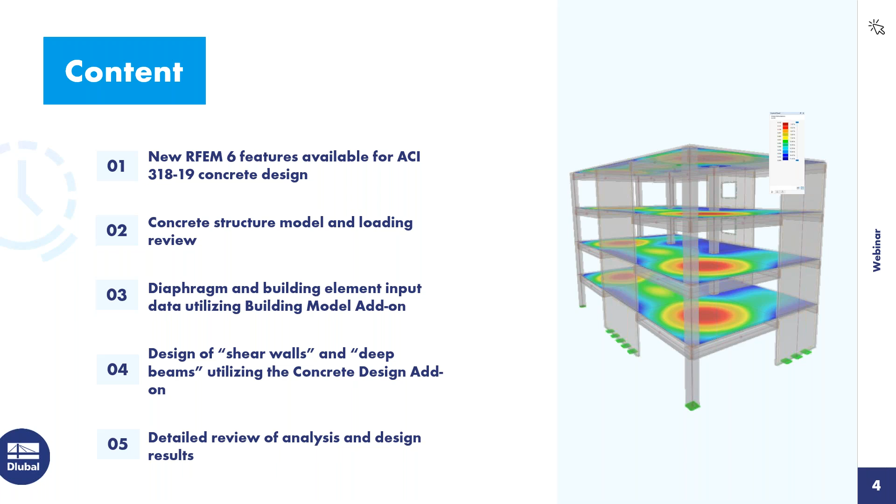For those not familiar with our program and the add-on concept, I want to quickly explain that for structure design related to concrete. RFEM 6 is the base program. This allows us to fully model the structure. We can integrate with BIM software. We have access to all the materials and cross sections in the library, and this is also valid for hybrid structures. We can load it and then get a full static analysis.

If we want to take this a step further to design the columns, beams, or surfaces, we need the concrete design add-on that will carry out the design according to the ACI, the CSA, or other international standards.

We then have the building model add-on. RFEM is a general FEA program, but this building model add-on releases building-specific features that give us the ability to define stories as well as shear walls and deep beams.

There are many other add-ons that will be relevant, but for today I want to mention a couple others used in our example for dynamic analysis. This includes the modal analysis add-on and the response spectrum analysis add-on to generate seismic forces. We won't go into detail on these add-ons today, but we have previous recorded webinars for both ASCE 7 and NBC that go further in depth on this topic.

Turning now to the new ACI 318 features implemented since our last webinar: we now have the ability to carry out the punching shear design check. This is for column-to-slab and wall-end-to-slab intersections. Currently, the design check will only flag the user if two-way shear reinforcement is required. There's currently no input option for that two-way shear reinforcement, but we plan to add that in the near future.

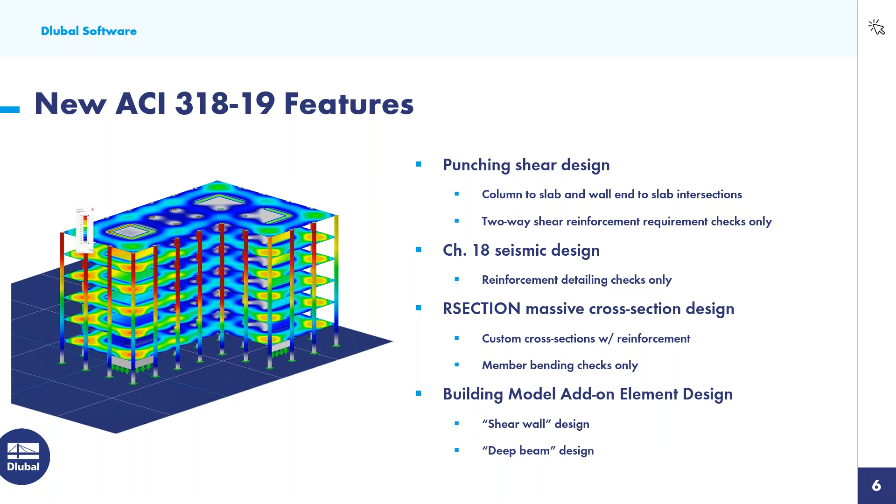Finally, we have the building model add-on that releases these building-specific features, and today we'll be focusing on shear wall design and deep beam design. In the next slide, let's talk a little more about the shear wall design we'll see in today's example.

This requires the building model add-on integration in addition to the concrete design add-on. Essentially, we draw these shear walls with 2D surfaces within RFEM. When we define it as a shear wall, what's happening underneath the hood is that a result beam is created, and a result beam simply sums up the internal forces across this 2D surface and presents it in a beam type manner.

We also can input the reinforcement under the shear wall dialog box. We have added this new cross ties input, and we'll see this in our example today.

As far as the design checks, we will refer to Chapter 11 for the in-plane design checks, as well as out-of-plane, in particular Section 11.5. We'll carry out additional Chapter 11 detailing requirements such as spacing and minimum reinforcement, and as mentioned, we also have Chapter 18 seismic detailing requirements where we'll check the spacing and minimum reinforcement requirements as well.

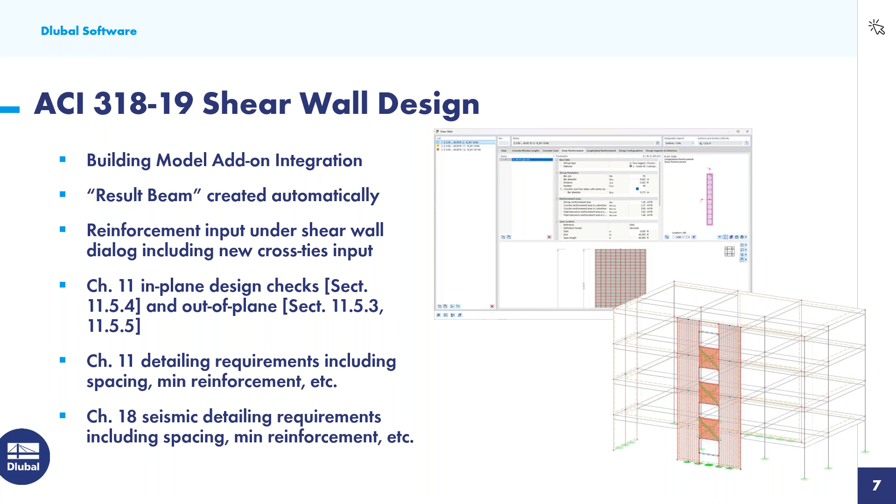Deep beam design follows a workflow very similar to the shear wall workflow in that we need the building model add-on integration. This is also defined as a 2D surface. We create a result beam underneath the hood, but instead of a vertical result beam for our shear wall, we have a horizontal result beam here to sum up all of the internal forces so that we can easily design this.

The reinforcement input options are also available under the deep beam dialog box, and we've added the new diagonal coupling reinforcement input. As far as the design checks, we will refer to Chapter 9 for deep beam shear strength and detailing design checks, and we can also consider Chapter 18 seismic shear strength and detailing requirements for coupling beams.

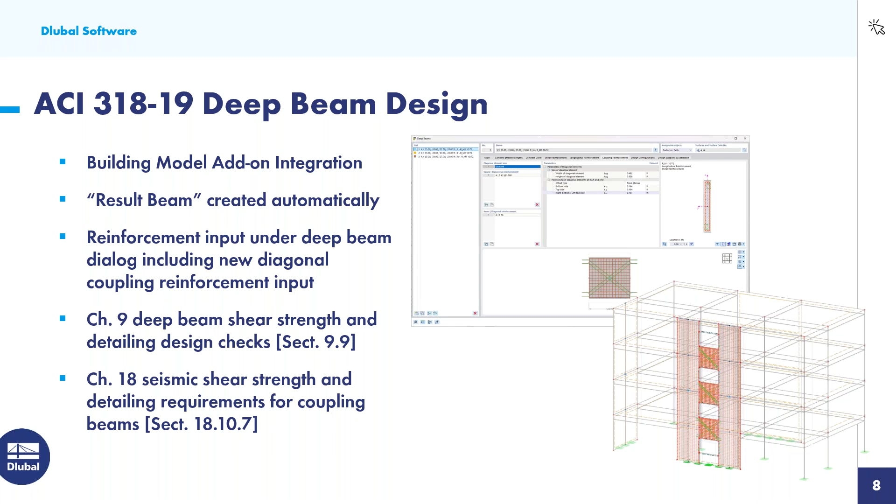With that said, we will now turn to our example within RFEM. When we begin a new model, we are presented here with the base data dialog box.

Under the second tab are all of the various add-ons that we have available, so essentially you're creating a custom software package specific for your design needs. For today's example, I want to begin by enabling the concrete design add-on, and we also talked a little bit about the dynamic analysis add-ons that we'll utilize in our example here.

Under the third tab for standards, we can generate the load combinations automatically according to ASCE 7. You'll notice here the latest 2022 standard is implemented. We'll also take advantage of our automatic wind load generators as well as snow load generators.

We can set the standard here under the second option also to ASCE 7. The concrete design is set to ACI 318, the 2019 standard, but you can see here the alternative standards we offer, including the CSA. Finally, dynamic analysis for the response spectrum analysis will be carried out according to ASCE 7.

Now that we have this information set, you'll notice I've gone ahead and modeled our concrete structure for today. So let's do a quick overview, beginning with the materials. Everything is defined here with 5,000 PSI concrete that was pulled in from our material library.

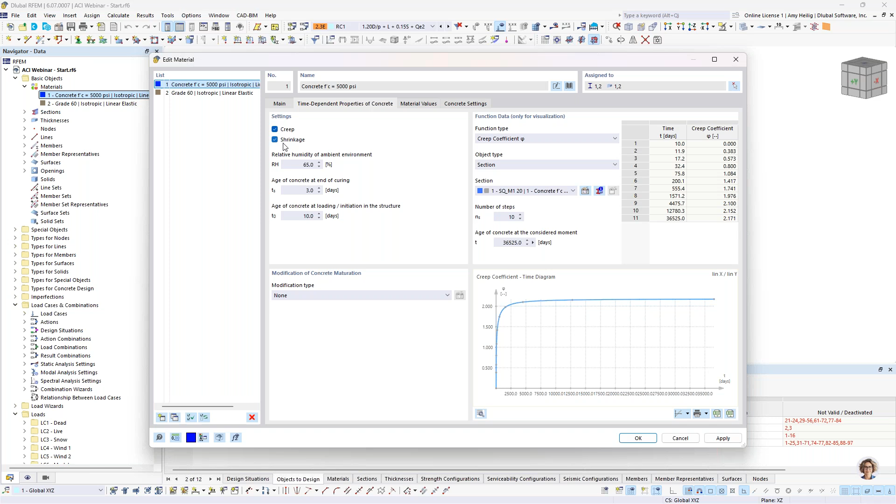Specific to concrete, we have this second tab available under time-dependent properties of concrete, where we can further specify the creep and shrinkage behavior of this material. This will come into play a little later on for those time-dependent deflections. If we do specify creep and shrinkage, we refer to ACI 209 for that consideration. For today, I'm not going to take advantage of the creep or shrinkage input.

So we will now move on to the cross sections. You'll notice the columns are defined as 20-inch by 20-inch square sections, and then we have various beams here that are supporting the slabs and spanning in between the columns.

If I zoom in here and double click on one of these members, I want to point out that the member type is not set to beam. A beam is any standard column or beam element, but rather this is set to a rib. When we specify this under the second tab, rib, we can actually define the effective width on the left and right hand side of this beam element.

We further have the ability to integrate the internal forces and loads from the slab element itself from the static analysis, and then we can design it as a T-beam within the concrete design add-on.

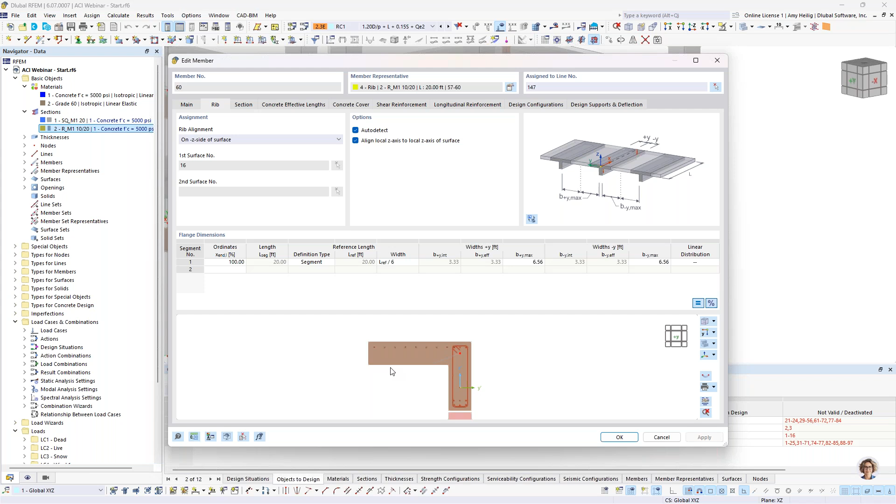For this rib element, we're at the edge of a slab, so we only have effective width defined on the left-hand side. This is unique to rib elements rather than a standard beam element. We also have the thicknesses defined here, assigned to the surfaces.

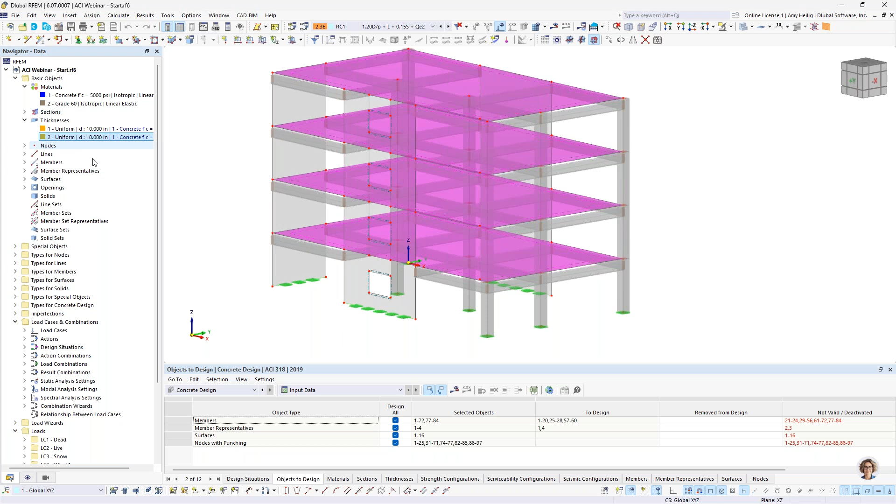For our shear walls, we have 10-inch thick concrete defined, and for our slab elements, these are also 10-inch, 5,000 PSI concrete. At the base of the structure, we have nodal supports at the columns that are rigid, and we also have a fully rigid support at the base of our surfaces defined as a line support.

So we'll now move on to a loading overview. Going into the load cases and combinations dialog box, you'll notice under the load cases that I have defined dead, live, snow, and wind. These are our static load cases.

Once we have these defined within this dialog box, we would actually need to apply the loads graphically to the structure. So we'll back out here and take a look within our drop-down at the dead load case. Self-weight is automatically considered internally for all of the elements, but I have added an additional surface load here of 50 pounds per square foot.

We are not confined to applying a surface load to the entire surface itself, as you can see with this option in our toolbar. Rather, we also have these options next to it called free loads. For example, a new free rectangular load could be applied to just a certain portion of the surface rather than the entire surface as a whole.

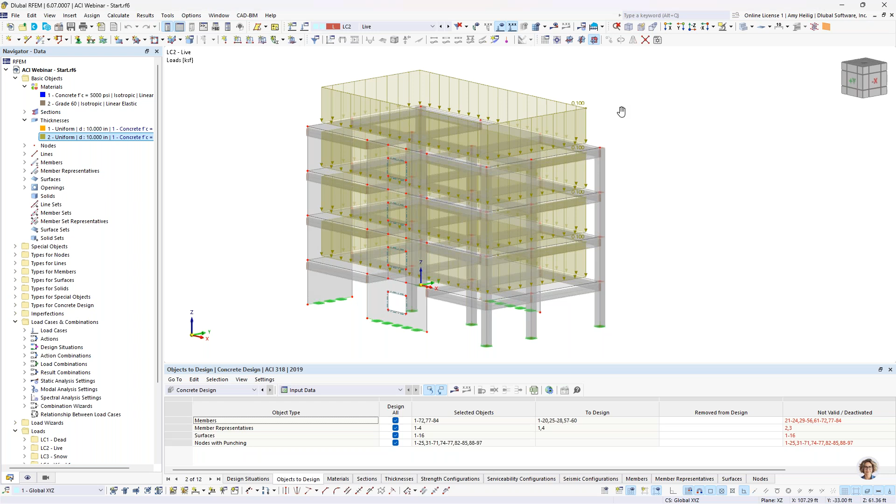We also have the live load case here, same concept. The magnitude for the surface load was increased to 100 pounds per square foot.

Then we have our snow load here at our roof level, and for this I took advantage of the load wizards found in our dialog box. Under the load wizards, we set this to ASCE 7 so that we can automatically generate the snow and wind loads. If I go into this dialog box, you'll notice we just specified the geometry and input the parameters specific to ASCE 7, and the program calculates these snow loads for us.

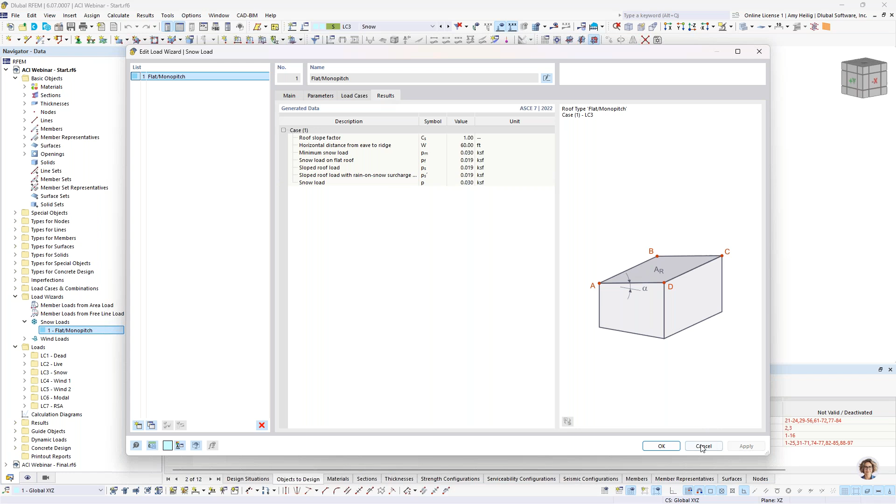Very similar, we have our wind load generator. If I toggle to my wind load case, we see this applied lateral load. I'll go into the wind load dialog box here. Again, we input the geometry points, the type of roof, and the parameters specific to ASCE 7, and the program can generate all of the wind load cases from case 1 and case 3 of ASCE 7.

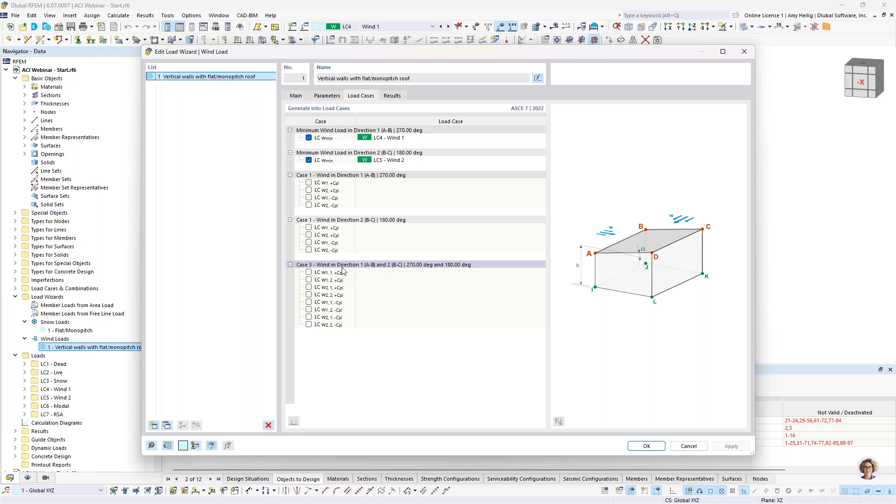For this simple example, I am just generating the minimum wind loads in both directions, so everything else is unchecked here. For our first minimum wind load, we can see this applied area load laterally in the global Y direction. If I'm interested, I can always right-click to display separately, which shows the loads applied to the structure based on the tributary areas.

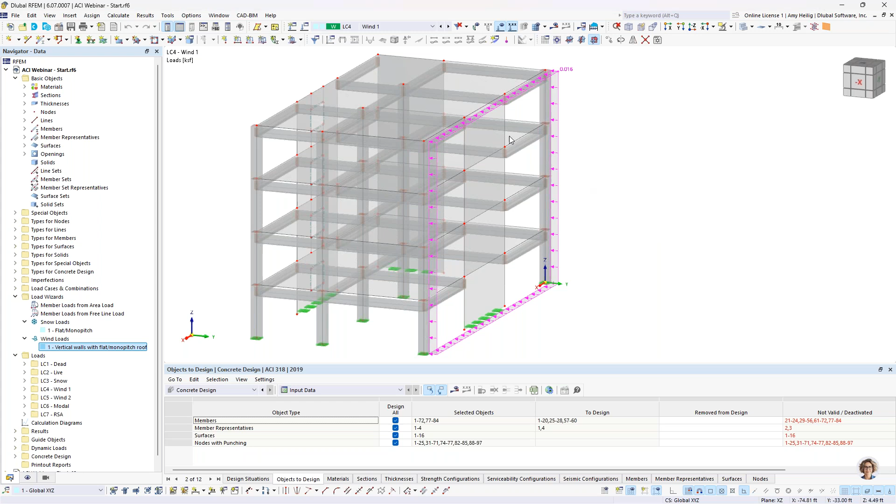If I'd prefer, I can turn this back off for a cleaner area load display instead. Similarly, we have wind load in the other direction with that applied area load.

Going back to our load cases and combinations, I also have a couple of dynamic load cases here as well. I'm not going into detail with this—it's covered in previous webinars on our website and YouTube channel—but we have a modal analysis load case where we carry out the eigenvalue analysis to determine the natural frequencies, vibrations, and mode shapes of the structure.

We can import a mass combination for this calculation, and we also have our response spectrum analysis load case, referring to ASCE 7 to generate these seismic loads in the orthogonal X and Y directions. Ultimately, once we have all of these load cases set, we need to combine them into the load combinations.

Under the design situations here, you can see that the program is automatically going to group together these load combinations in what we call a design situation. So we have our first two design situations here in orange that are going to include our factored load combinations from the ASCE 7s, 1 through 5.

And then this second factored design situation is going to include all of our seismic loads, 6 and 7, again directly from the ASCE 7. We can click on this little info button here to see that information pulled directly from the standard.

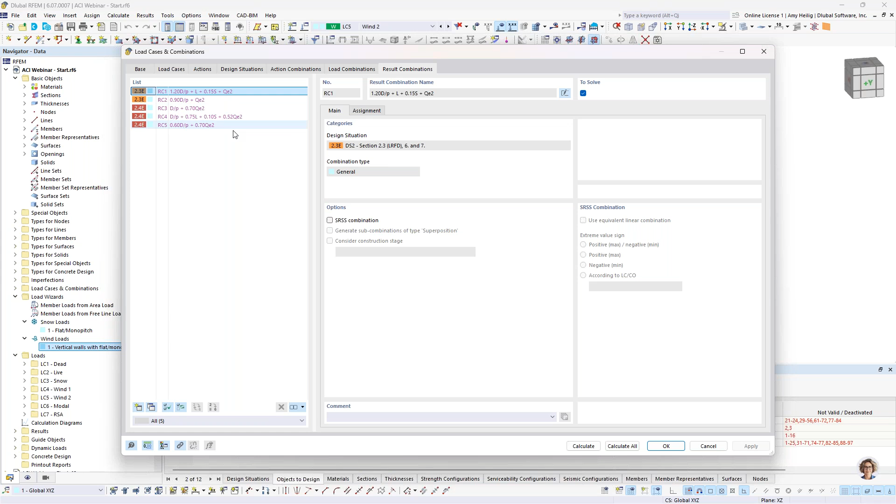One more thing I want to touch on is that you'll notice that for the load cases, I have a structure modification set here, and this is really important for concrete design. If we go in and take a look at this definition, I have enabled both members and surfaces because these are the two elements that we have in our model today. And then I get two additional tabs up here at the top.

Within my first definition type here for members, what we have the ability to do is to directly select the ACI 318. And this is going to refer to table 6.6.3.1.1a to apply those I-crack factors to our member elements within the model. We would want to select whether this is a column or a beam, and we can see the relevant stiffness modification factors given here.

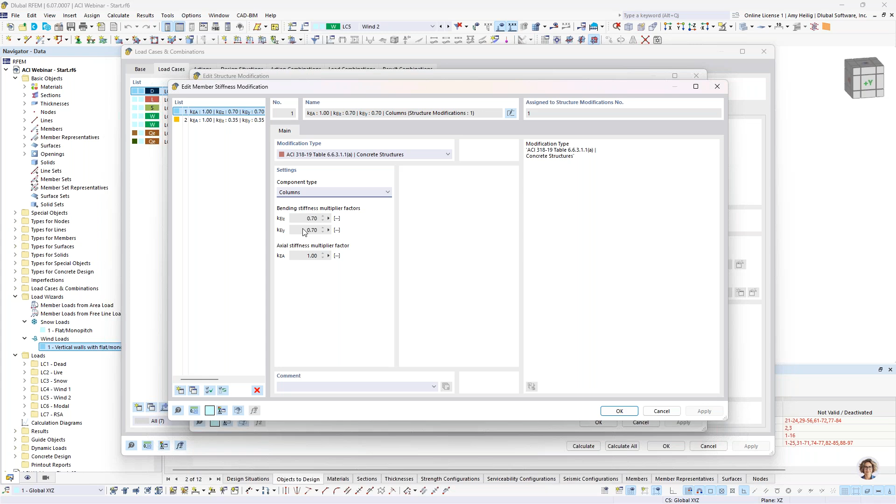So once we have this definition, then we can graphically select all of the column elements within the model that this stiffness reduction should be applied to. Same exact concept here for our beam elements.

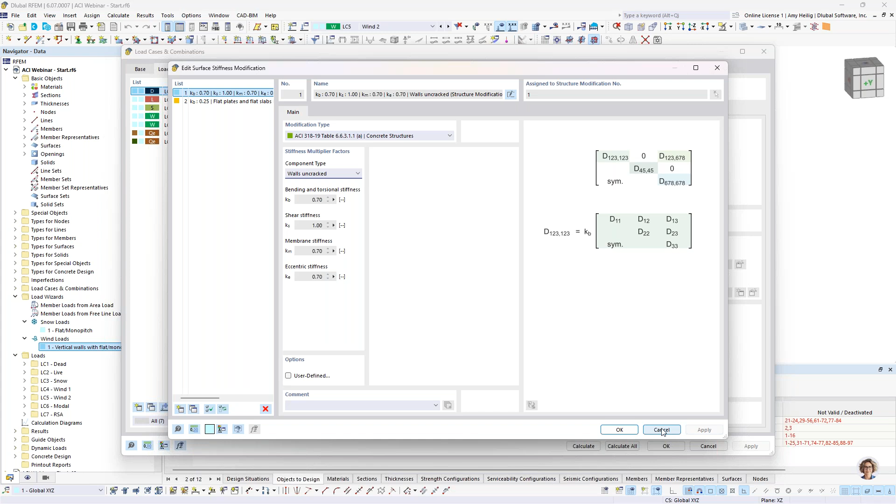And in a very similar manner, we also have the surfaces tab here that I created my first definition by simply selecting the ACI from this dropdown, and then I would choose whether it's walls uncracked, walls cracked, flat plates, or flat slabs. This refers directly to the ACI for those I-crack factors, and then we can graphically select the surfaces that this stiffness reduction should apply to.

So we could go ahead and apply this to all of our load cases. It's also possible here under our design situations, especially these factored design situations, that we go in here to the combination wizard options and we activate this structure modification here as well. So by doing it within the design situation, you'll see here that the load combinations automatically include those I-crack factor stiffness reductions as well.

So now that we have covered the loading and the structure, it's now time to input the reinforcement that's specific to the concrete design add-on that we have already enabled within the base data dialog box. So before we begin, what you'll notice here is that we do have the concrete design option available within our dropdown of our table. So when we select this, there is this option here called global settings.

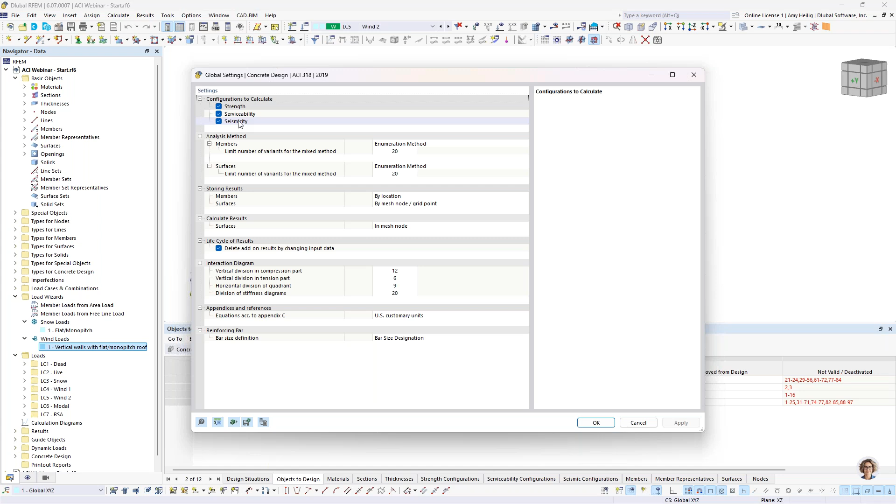Now, by default, the strength and serviceability design checks will always be carried out. But if we are wanting to further carry out those seismic detailing checks, we would want to go in here and turn this on, because by default this is typically not enabled. So we'll go ahead and do that for today.

Okay, so we want to talk about the reinforcement input for a column. If I double click on this column here, you'll notice the design properties checkbox is turned on. This tells the program that not only are we interested in carrying out the static analysis within the base program, but I also want to utilize that concrete design add-on to input the reinforcement.

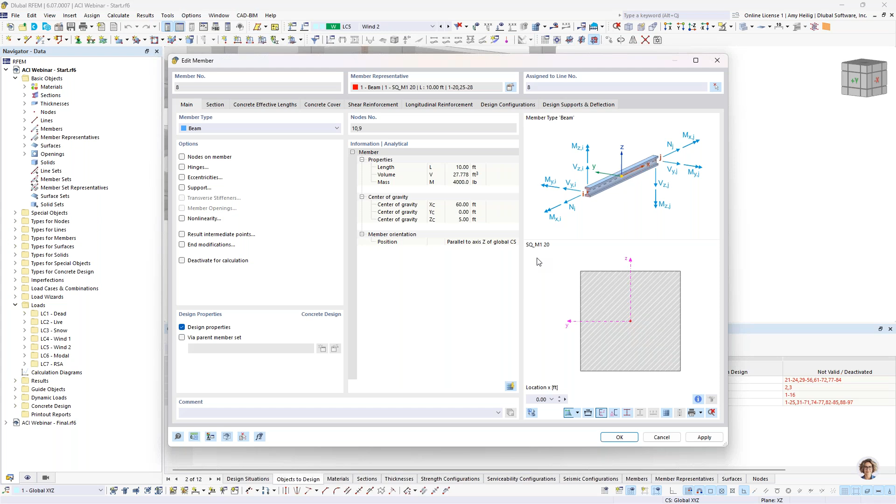Now, when I turn this off, you'll notice all of these tabs disappear. This simply tells the program that we're only interested in the analysis. So we certainly could carry out the reinforcement input here within this single column, but I do want to talk about the benefit of what we call member representatives.

Currently I have this turned off graphically within the model, so I'll go ahead and turn that on. You'll notice we have a lot of color-coded dots here for each of these members. This is because the program has grouped together identical members in what we call member representatives. Members that have identical cross sections, materials, lengths, and possibly even for concrete, the same reinforcement input, will all be grouped together.

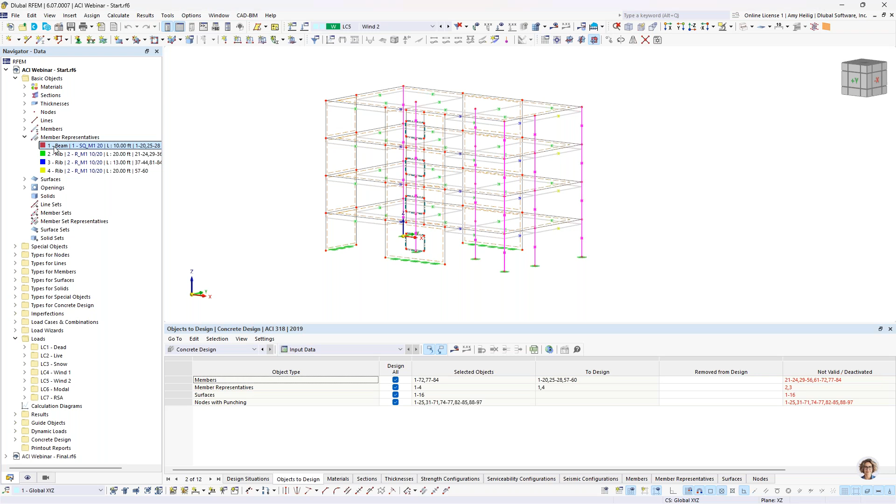Now, the benefit is that if I take a look at member representative number 1 here, you'll notice this has grouped together all of my columns, highlighted in the background. I have these exact same tabs here to input the reinforcement as I do for the individual columns.

The benefit is that if I define the reinforcement here within the member representative, it's applied to all columns at once. If I need to go in and make a change, I do it within the member representative, and again, it's going to affect all the columns defined here. So we will go ahead and input these various tabs, and I'll go through these in detail.

The concrete effective length: if we are carrying out a first order analysis and utilizing the moment magnification method, we would want to go ahead and input an effective length. However, if we are designing to second order analysis and considering P-delta effects, which we are within our load combinations today, we don't really need to do anything within this particular tab. So we'll go ahead and design according to second order analysis.

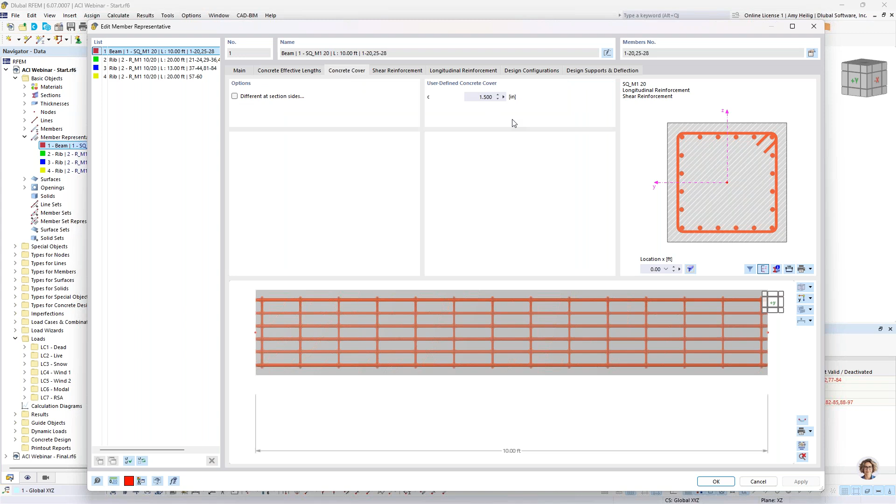Now the concrete cover should be input. This is left here at 1.5 inches, which is the default.

Now I went ahead and input the shear and longitudinal reinforcement for these members, so we'll just go ahead and give a quick overview. The shear reinforcement is set at number 4s at 9-inch spacing on center, so we can see that spaced out evenly along the member here.

Now it's entirely possible to create different zones for both our shear and our longitudinal reinforcement with this option in the lower left-hand corner, and then we can modify the span location. So for example, if we wanted closer spaced shear ties at the ends of the member versus the center, we could create a couple of different zones here.

The longitudinal reinforcement, you'll notice I have selected the option from our dropdown here as uniformly surrounding for the longitudinal bars. I have defined 20 number 6 bars, so the program will go ahead and place these around the cross section as shown.

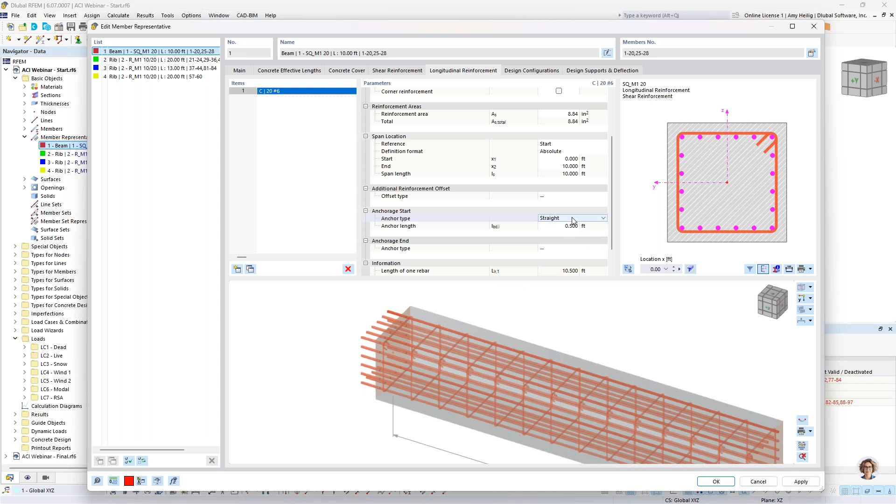Now we do have additional options here to define a development length if we would like. You can see that within the dropdown box here where the development length is shown graphically, and we can modify that development length itself in terms of feet. For today's example, I'll go ahead and leave all of the development lengths off, but that is where you would want to input that information.

Now, the design configurations - I'm only going to go through this tab once because it's the exact same application for all elements we are designing. We have here these strength configurations to begin. If I go into the default setting here, you'll notice we have 4 different tabs depending on which element we're designing, whether it's a member or surface or even punching shear. These are all of the various options specific to the strength design checks according to ACI.

So whether we're turning options on or off or modifying them, this is all specific to the strength design. We did put in the code references, trying to clarify exactly which settings you are modifying, so you can refer directly to the ACI standard. Now, it is also possible to create different configuration settings for different elements. Currently this is assigned to all of our surfaces or members or punching shear, but you can create multiple definitions in the lower left-hand corner and assign them to different elements.

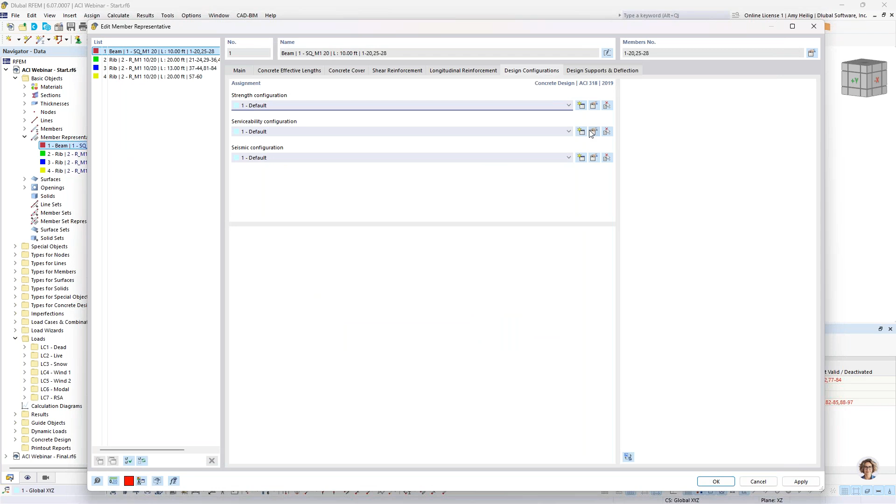We also have the serviceability configurations here, which are specific to the serviceability design check. For example, we can calculate the crack width. For surfaces, we have minimum reinforcement due to shrinkage and temperature. We also can check deflections, whether that is simply supported or cantilever beams or columns, and this also can be carried out for surfaces.

If you remember, we talked a bit about time-dependent deflection. I mentioned that under the material properties, when we input creep and shrinkage for that material in more detail, we probably want to toggle this to refer to ACI 435, which is a far more complex approach within the serviceability design checks for long-term deflection. Alternatively, when we leave this as default with the factor according to ACI table 24.2.4.1.3, we're simply going to apply a factor to the immediate deflection based on the duration of the load - a much more simplified approach.

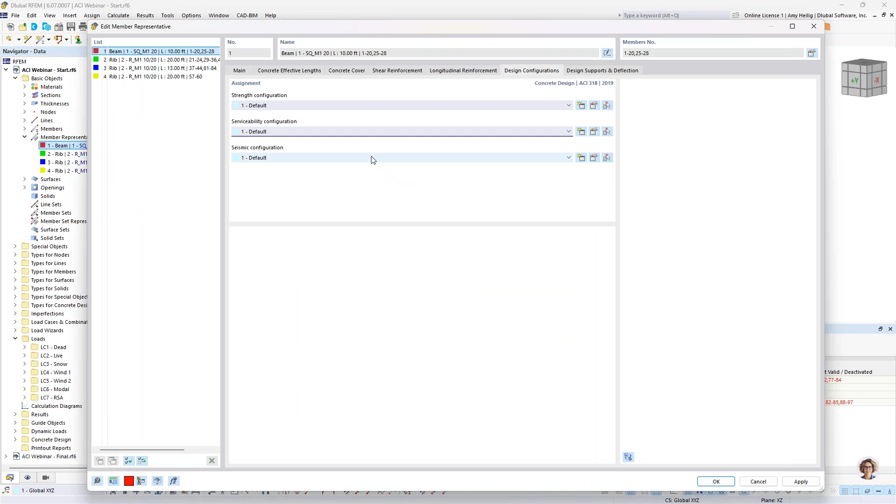Finally, we have the seismic configuration. For the seismic detailing checks, we can select for our members whether the seismic design category is one of the options from this dropdown. We also have the frame type here, set to ordinary, intermediate, or special moment frame. Again, this is applicable to members and to surfaces for those additional detailing design checks.

Finally, we have the design supports and deflection. If I input nothing within this tab, the program will simply assume that this member is supported at both ends, and it will refer to the limiting deflection ratio for simply supported members. In contrast, if we have a cantilever, we probably want to assign a design support at the left or right end so that the relevant deflection limit is referred to. I am just going to leave this as simply supported for our column elements, but we'll see in a minute how we can set this differently for our rib members.

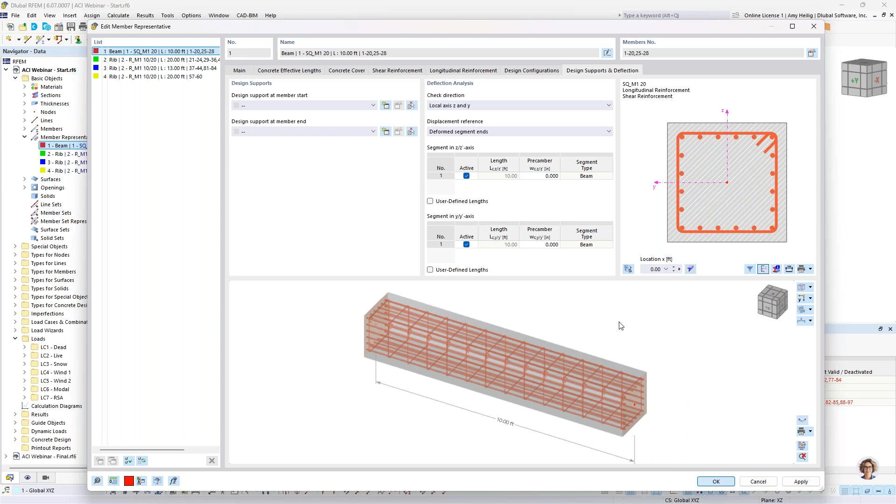Once this information is done, we want to move on to the reinforcement input for our four rib members over here on the right-hand side. Very similar to the columns, these are all grouped together in a member representative as well. Taking a quick look to review, because it's a rib member, we are going to include the effective width of the slab for the member design. And we run through these various tabs.

Concrete cover is set to 1.5. The shear reinforcement is number 4, set at 6 inches - again, we could set different zones if we'd like. The longitudinal reinforcement is going to be a little more detailed than what we saw with the columns. You'll notice I have 3 number 6s set to symmetrical, so this places 3 number 6s up at the top and at the bottom, currently highlighted. We also have an additional 3 number 6 bars defined at the bottom with what we call the rebar type line.

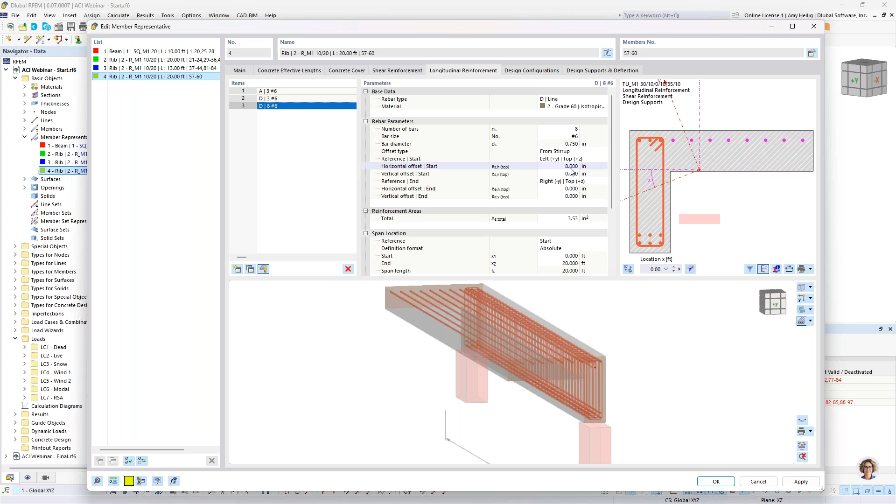This line option allows me to place a line of reinforcement, and I can specify the different offset either left or right or top or bottom with this input option. Finally, we have 8 number 6s that are defined in that surface effective width itself, also defined with the line option. I modified the offset here, such as 8 inches, so that we can input this longitudinal reinforcement within the slab element. It's pretty simplified for today because we'd probably want to create different zones with different longitudinal reinforcement, but this is just a little overview for this simple example.

And finally, the design supports. What I would like to do with the beam element is maybe reduce the shear force for our design check a distance of D away from the support face. The only way to do this is to input a design support. You'll notice I created a definition type here for a new support type, and the type must be set to concrete. We would set the support width, which I've set to 20 inches to reflect the column it's connected to. We would define whether it's an inner support or not - in this condition, it's not an inner support. We also can define if the support should be active for deflection design in the strong and weak axis. For clarification, I just went ahead and activated this in the strong axis direction.

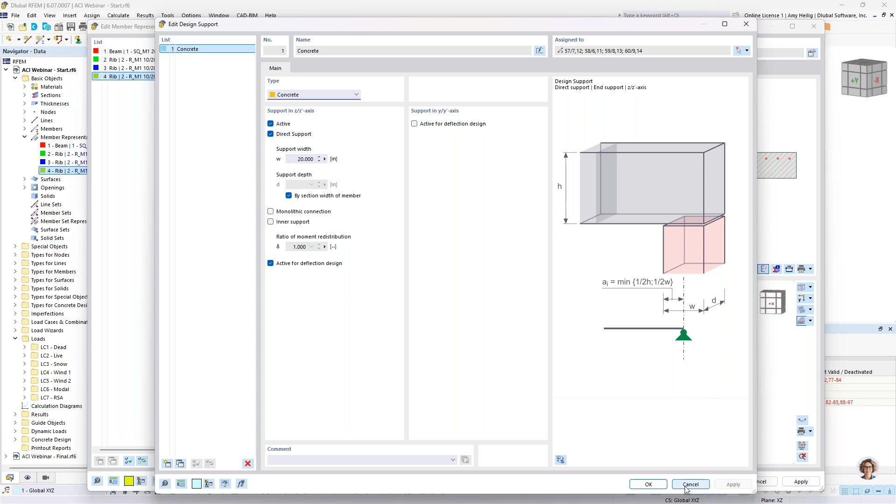Once we create that support, we can select that same definition type here at the member end, and we actually see the support shown graphically in this dialog box. This is how we can consider that reduction of the shear force.

Now that this information is input for our beams and columns, if I go to the second tab under the navigator and turn this into wireframe view, we can actually view the reinforcement that we have input graphically in the global 3D model. This is only specific to the elements I have defined so far. If it feels a little overwhelming, you can always turn that off.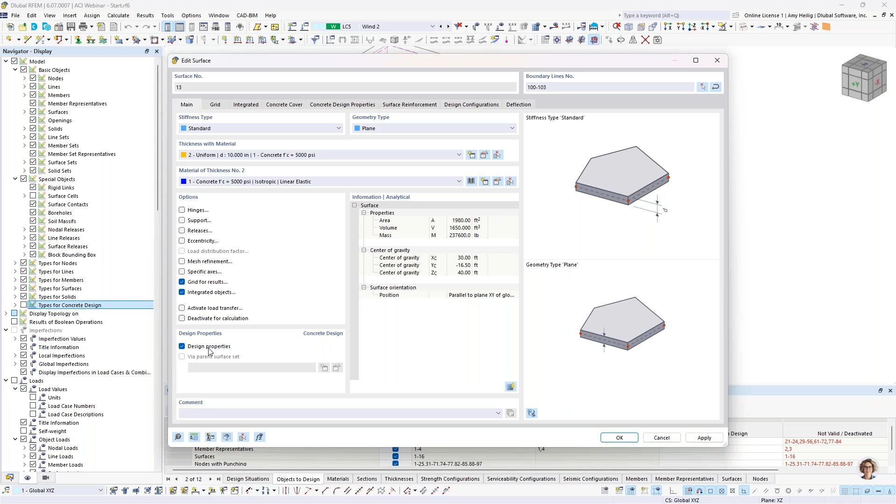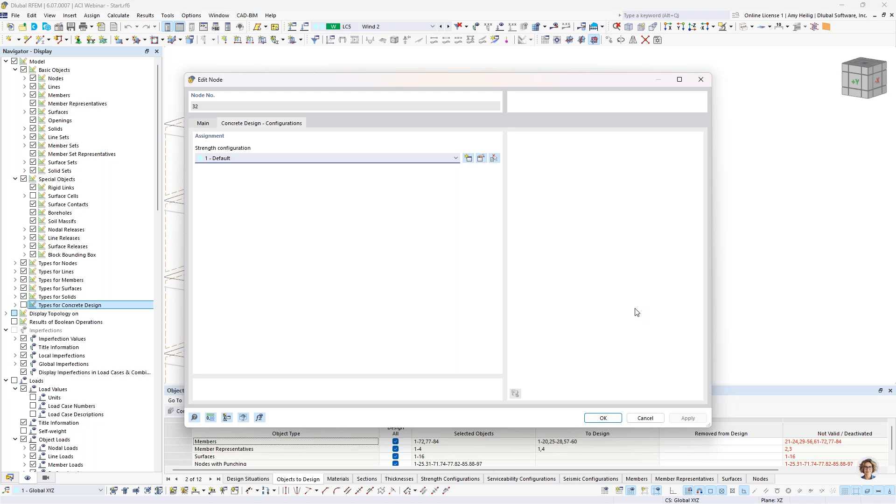Now, to talk about the surface reinforcement, I'm not going to go through this—it was covered in a previous webinar, but it's the exact same concept where we can activate the design properties and input the surface reinforcement. Similarly, for punching shear checks, we would choose one of the nodes where it's framing into that reinforced slab, double click on it, and again we have a checkbox for punching design and an additional tab for the strength configurations for those punching design checks. We won't be doing either one for today's example, but I wanted to mention it.

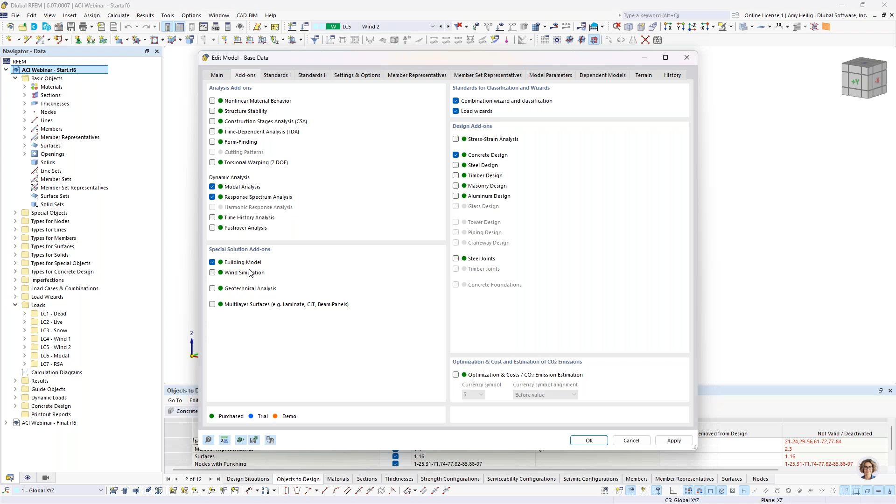So now it is time to move on to the building model add-on. I want to right-click to activate the base data dialog box, and under the add-ons we will turn on the building model add-on, then click OK. At first glance, nothing changes graphically. The only thing we now have access to in the navigator is a new folder called the building model, so we can now define our building stories in this general FEA program. I'll go ahead and double click on this dialog box.

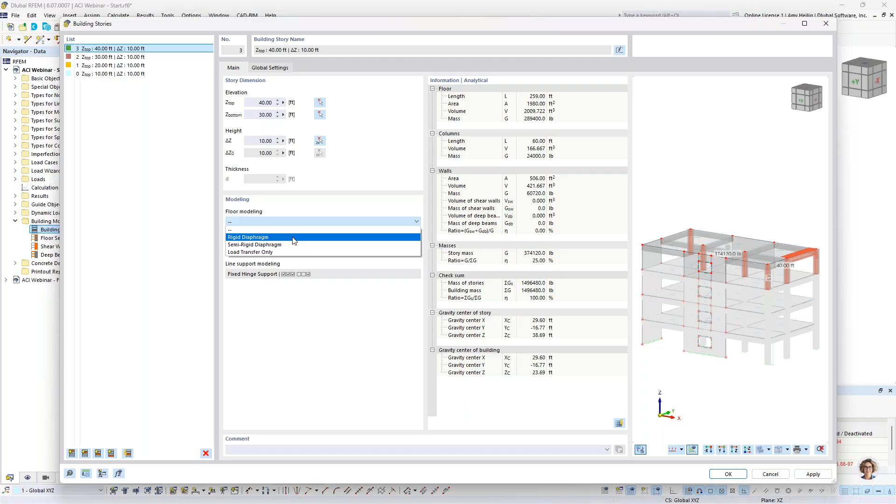The program automatically assumes we want to create our first story and detects the height of that first level. We'll continue to create additional stories above it using the option in the lower left-hand corner, for a total of 4 floors. Once we've created the different stories, for each floor we now have the ability to assign a diaphragm—either to that particular floor or to all floors—including rigid, semi-rigid, and load transfer only. Let's go back to the PowerPoint because I want to discuss the building model add-on concept in more detail, as well as these diaphragm options.

As mentioned, RFEM 6 is a general FEA program. We are not restricted to only building analysis and design; rather, we can model tanks, silos, fabric tensile structures, or maybe an FEA of a steel connection—really anything is possible. But this building model add-on is releasing building-specific features in this general FEA program, such as the ability to define stories. We also have the option, which we'll see in a minute, to define shear walls and deep beams.

The added benefit of the building model add-on is that once we run the static analysis and even the dynamic analysis, we get additional results available in table format by stories. For example, in a response spectrum analysis, we can view the story shear or base shear in table format. For static or dynamic analysis, we can also view the shear wall forces in table format and export that to Microsoft Excel quickly. If we have a rigid diaphragm, we can view in the table the center of rigidity, as well as graphically where that center of rigidity occurs. So many more options specific to buildings will be released.

Now, as mentioned, we have various diaphragm types available. We recently released semi-rigid diaphragms, so now we have all 3 options available to you: rigid, semi-rigid, and what we call load transfer only, otherwise known as a flexible diaphragm.

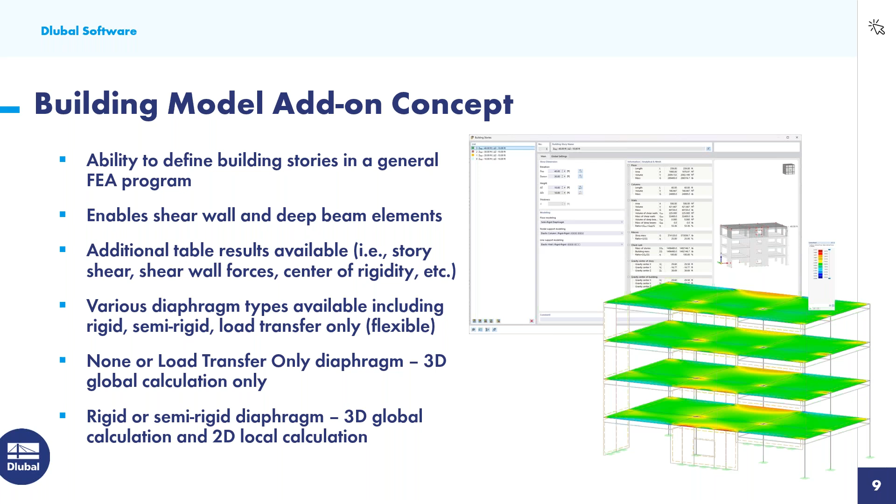However, when we choose a rigid or a semi-rigid diaphragm, not only are we going to carry out this 3D global calculation, but we're also going to extract each individual floor to run a separate 2D local calculation. So let us go to this next slide to explain this in a little bit more detail.

Again, this is specific to rigid and semi-rigid diaphragm options only, where we are going to run these two separate calculations. As I go through this, keep in mind that we will see this in the results in our example today, so hopefully that will make more sense once we can see it applied.

The first 3D calculation, what we call the walls global 3D calculation, we are going to run through all load combinations. This includes both gravity and lateral loads. The difference here is that the floor in-plane stiffness is going to depend on the diaphragm type, and I'm going to talk about the stiffnesses on the next slide for all the different options. But for the floor out-of-plane stiffness, this is going to be set to 0. So this is what you can expect with this 3D calculation.

Then we're going to run an additional local 2D calculation. What we do here is we extract each individual floor or diaphragm and all the surfaces included in the horizontal direction, as well as those rib elements, and we run a separate submodel calculation underneath the hood. Instead of the columns and walls framing up underneath this floor, we replace those with nodal and line supports.

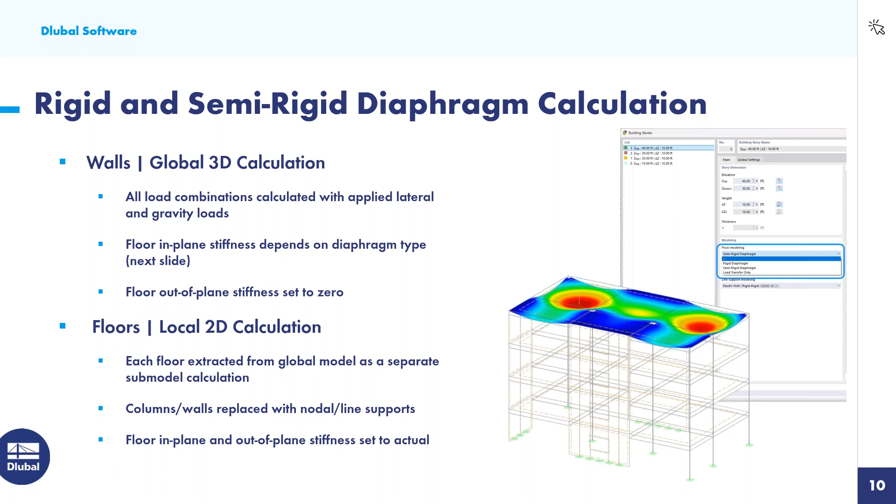So on the next slide, I thought it would be worthwhile to create this table to summarize the different diaphragm stiffnesses depending on the type that you have set for both the 3D and the 2D calculation. You can certainly refer back to this table if you're integrating these diaphragm options, if you're wanting to know what type of stiffness is used where.

Over on the left, we have the different diaphragm types, including rigid, semi-rigid, the load transfer only, otherwise known as flexible, or if you have no diaphragm set. Now, the first couple columns here is going to be related to that global 3D calculation. The rigid diaphragm is going to use no stiffness in the out-of-plane direction, but in the in-plane direction, we set this to something infinitely high, a very, very high stiffness.

In turn, for this semi-rigid diaphragm, again, out-of-plane stiffness is set to 0, but the in-plane stiffness is going to be the actual stiffness. So we're going to look at the materials, the thicknesses, and use the true stiffness properties in the in-plane direction for that 3D calculation.

Then we also have the load transfer only, otherwise known as the flexible diaphragm. And for both out-of-plane and in-plane, the stiffness is set to 0. This is the entire intent of a flexible diaphragm: it doesn't add stiffness to the global 3D model. Rather, we use it to distribute loads only to the elements that it's attached to.

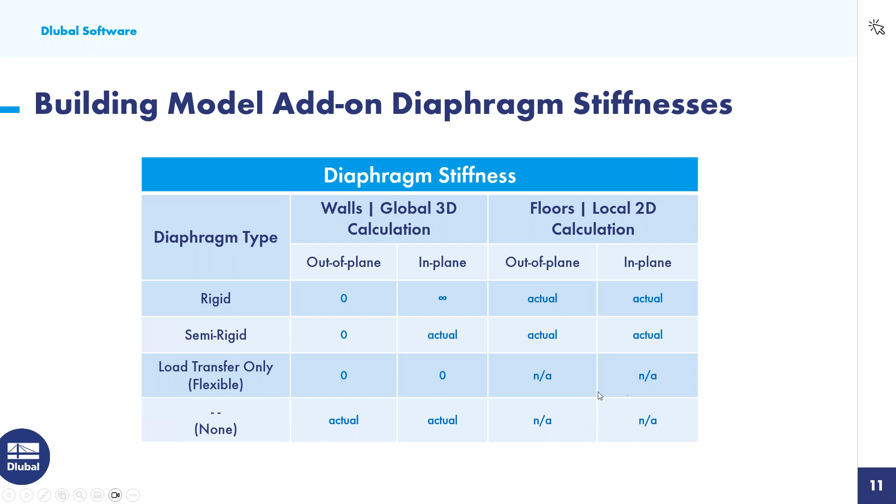So we'll go back to our example today, and for all 4 of my floors, I'm going to define here a semi-rigid diaphragm. Now remember, for rigid or semi-rigid diaphragms, when we carry out that separate 2D calculation, we're replacing the walls and the columns underneath it with line and nodal supports.

Rather than having line and nodal supports set to fully fixed or fully released, the program can calculate the true stiffness of those elements framing up underneath it, and we can create an elastic support condition with a spring stiffness set. So that's what I'm going to use today—I want the program to refer to the true stiffness of the elements framing up underneath it.

Once we've set this information, if I double click on one of my floor elements, the stiffness type is now set to floor slab semi-rigid diaphragm. I can't modify this because it's defined directly within the building model add-on.

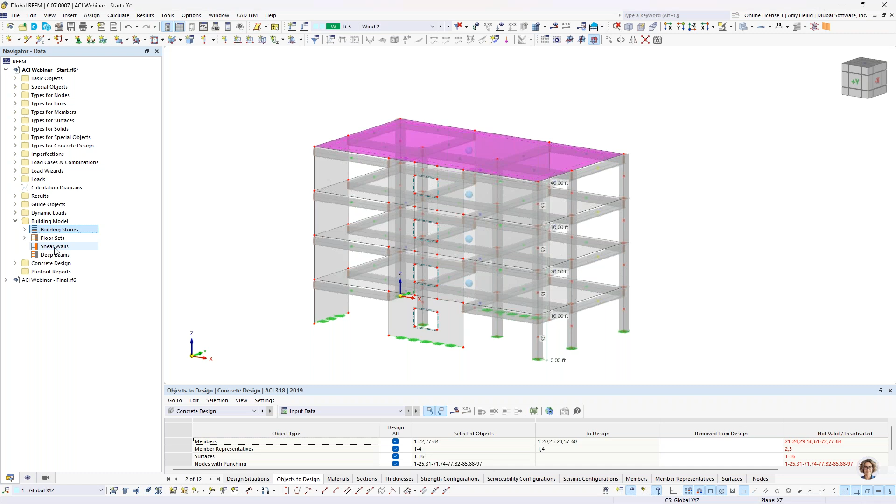In addition to the building stories already defined, we now have the ability to create our first shear wall definitions. Before we do, I'm going to activate what we call the surface cells—I had turned them off graphically, so I'll turn those back on.

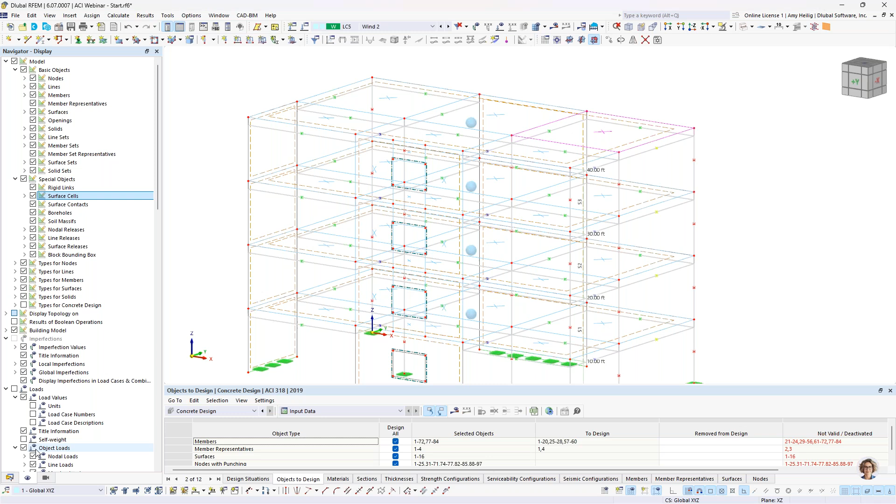Surface cells are automatically turned on when we enable the building model add-on, and you can see they're created at various portions of the structure on the surface elements themselves. I'll switch to an elevation view and highlight only my front shear wall.

For this first shear wall, you'll notice I don't have those surface cells. Anytime you have a shear wall with an opening, to generate these surface cells we need to create a line element that spans from the opening to the edge of the surface. We can do this manually with the new line option in our toolbar, graphically drawing that line, but I'd like to show you a quick trick.

With our drawing tools at the bottom, we have this option to extend the line graphically—something similar to what you'd find in AutoCAD. When I choose this option and hold down the Alt key on my keyboard, the program will automatically extend this line when I click on the upper left and right hand sides.

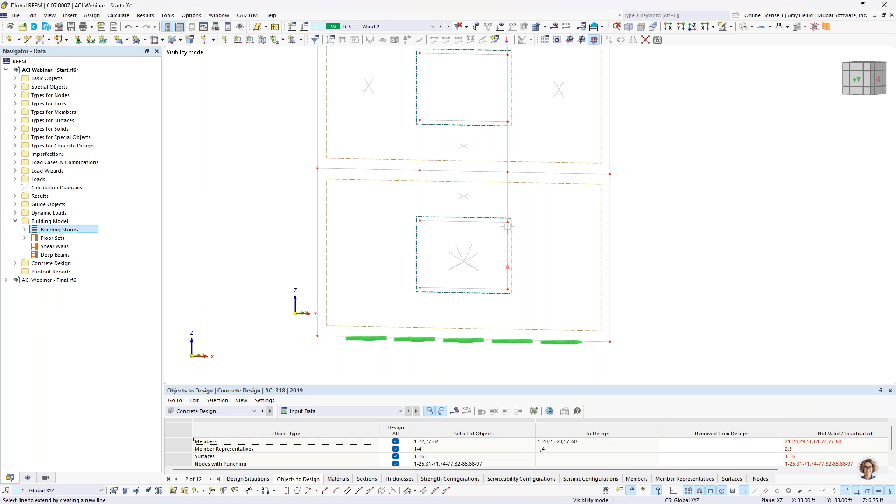I'm doing this at the bottom right and bottom left without affecting the opening. Now you can see those line elements are automatically created, again without affecting the opening, and the surface cells were automatically detected when we do this. So in case you have a shear wall with openings, you'll want to take this workflow.

Now we can define our first shear wall by right-clicking within our building model folder, and we create our first shear wall definition. We want to select the surfaces or surface cells, so I'll graphically select all of my surface cells on the left-hand side of this opening to define one continuous shear wall on the left-hand side.

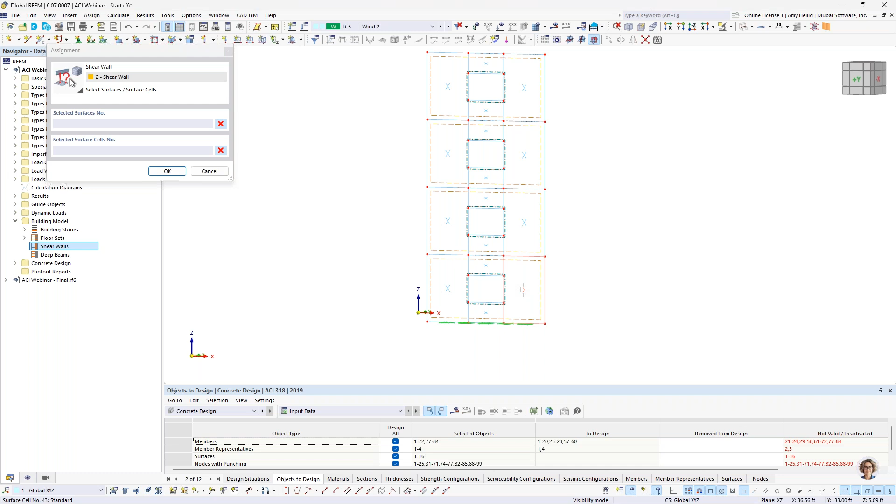Once that's done, I'll create a new definition type and do the same thing on the right-hand side of the openings—that's one more shear wall definition. For this one, I'll cancel out the visibility and go back to a rendered view because I want to create my third shear wall over on the left-hand side.

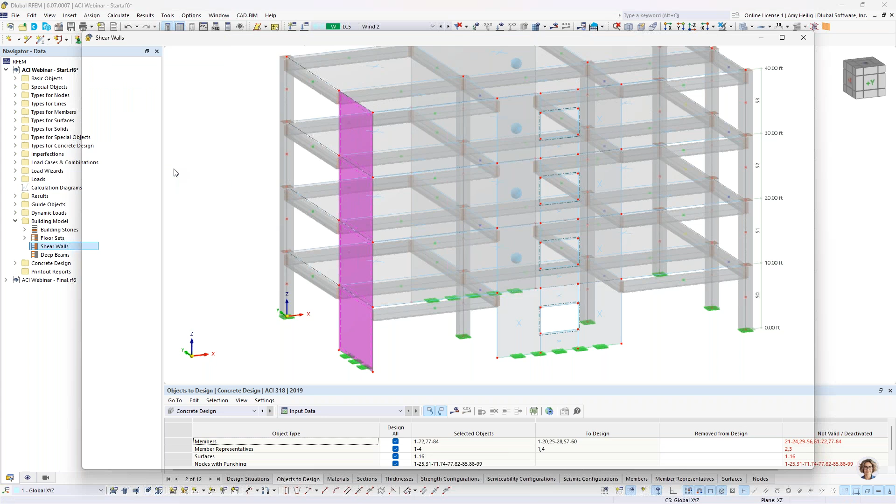Notice this one doesn't have any openings, so we can just directly select the surface itself without having to worry about the surface cells. Once we have input the shear wall definitions...

We can hold down our shift key to select all of them, because I'm going to input the same options here for all 3 shear walls at once. Now the first option here is to generate the results section.

Remember, I talked about how that result beam is created underneath the hood. Then we can present the internal forces summed up over these surfaces in table format. That's just what we're enabling here for the static and dynamic analysis, to present that in table format.

Now, very similar to our columns and rib elements, we want to turn on the design properties because we'd like to design these in the concrete design add-on.

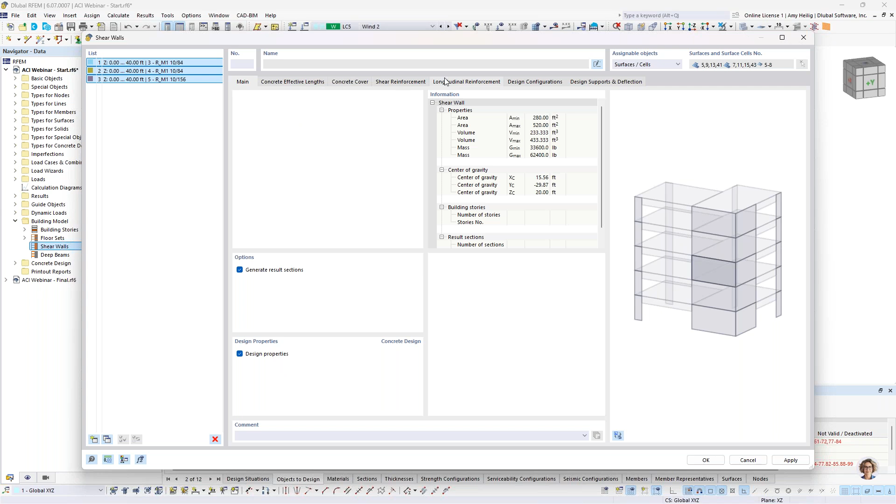And then we have the additional tabs up here at the top. So the concrete cover is going to be set at 1 inch for our shear walls.

I'm going to jump to the longitudinal reinforcement first, and select the option uniformly surrounding. With this option, I want to place the reinforcement at the bent corners of my stirrup, and the number of bars is going to be set to 22 number 7s, selecting number 7 bars from the drop-down box. So the program places these longitudinal bars all the way around the shear wall.

We're looking at it in a plan view here. Now, the only modification I want to make is to shear wall number 3. This has a much longer width than the first couple shear walls, so we'll increase the longitudinal reinforcement to 40 number 7s, and we see that adjust graphically.

So now going back to the input for all 3 shear walls, we'll go back to the shear reinforcement. I'm going to select number 5s from my drop down, and adjust the spacing to every 5 inches, so 0.417 feet.

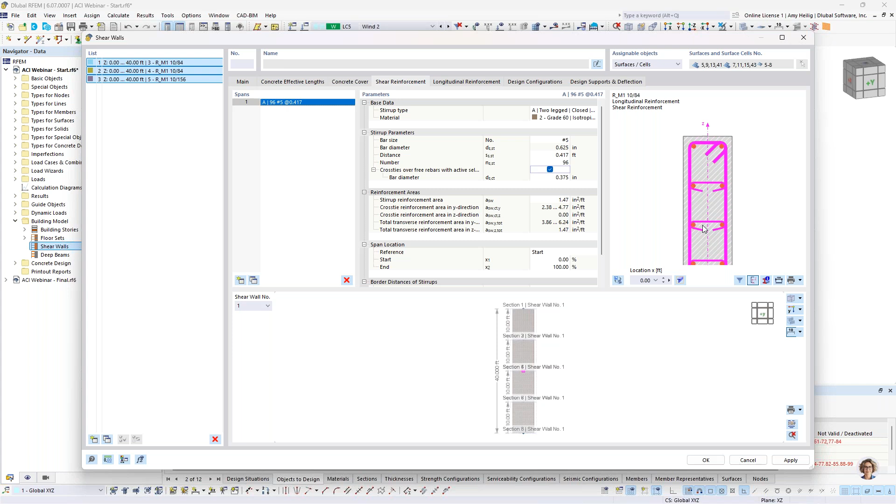This is a new option we have added within the shear walls, to generate what we call the cross ties when I activate this checkbox. So now we see those cross ties enabled across all of the longitudinal bars here.

Now, if you perhaps do not want to consider a cross tie at any one of these locations, you can just graphically click on the longitudinal bar in our preview, and that cross tie will be deleted. If you want to add it back in, you just click on the longitudinal bar again, and you'll see that cross tie considered.

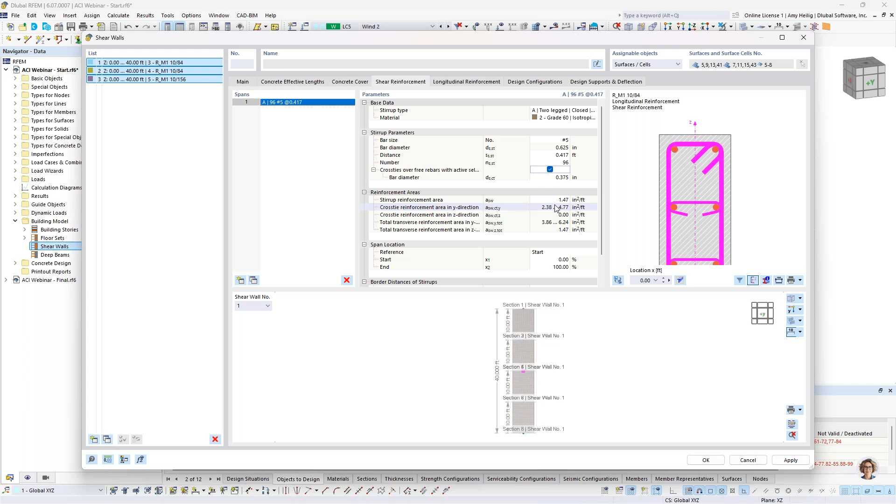Now, lastly, we have the design support. Very similar to what we saw with our member elements, we can also add design supports where it's framing into the slabs or the floors along the height of our shear wall.

So for the start and end of the shear wall, I'm going to create a new design support of the type concrete. The support width is set to 10 inches because this is how thick my slab is that's framing in the transverse direction. For this one it will not be an inner support. I click OK, and then select this new definition within my dropdown, and we can zoom in and see that design support shown graphically at the start and end of the shear wall.

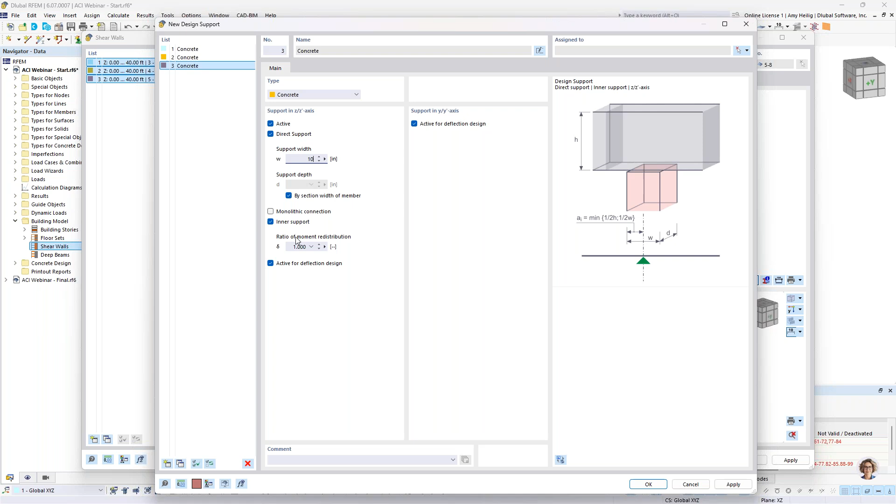Now for my interior support, we can create a new definition type. Again very similar, 10 inches in width, but this time it will be an inner support. We can select this from our drop-down box for all of the interior support options. You can also hit F7 on your keyboard to copy the cell from above into the current cell. Now we see those support conditions modeled along the height of the shear wall, representing those slabs framing in at those transverse locations.

All right, now that we are done with our shear wall input, let's talk about deep beams. This is really going to be a very similar workflow. We're going to begin by right-clicking to create a new deep beam, and the program will ask which surfaces or surface cells we want to consider. I'm going to zoom in and choose the 2 surface cells spanning between the openings of my first and second floor.

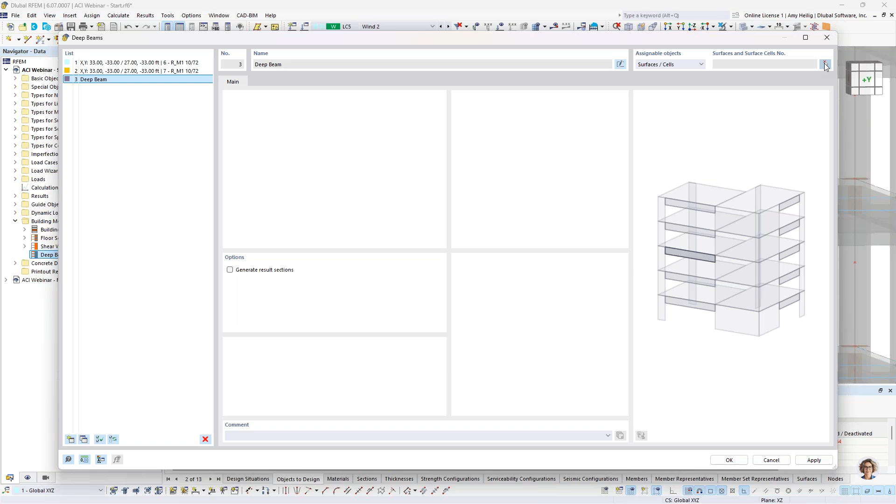I'm going to create my second deep beam that will span between the openings of the second and third floor. And finally we are going to create our third deep beam that spans between those upper floor openings.

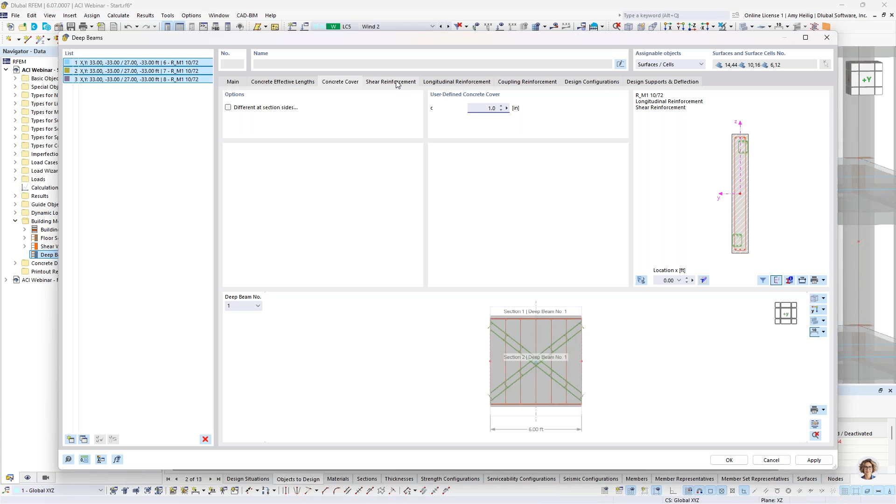I'm going to highlight all three of these to generate the results sections and also turn on the design properties with the coupling reinforcement specific to deep beam input. The concrete cover will be modified to 1 inch. And then we have the shear reinforcement, so I'm going to specify number 5, similar to our shear walls, at 0.417 foot spacing.

We further have our longitudinal reinforcement, so for this one I am going to select from my dropdown, uniformly surrounding.

We're going to go ahead and place rebar at the bent corners of the stirrup with this checkbox. I'm going to select 30 number 6 bars, and the program will place those evenly around the perimeter of this deep beam.

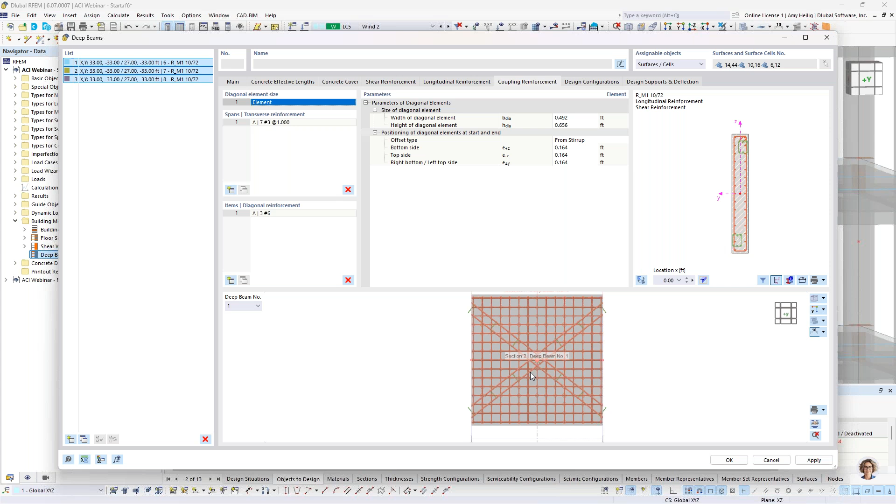Finally, we have the coupling reinforcement, which is new and specific to the deep beam design. The first input is the transverse reinforcement, highlighted here to bundle these diagonal bars together. The default is number 3 at 1 foot spacing, which we'll leave as default.

We also have the diagonal reinforcement itself, which we can view here or zoom into the cross-section view. This is 3 number 6 bars set at both the top and the bottom. Additionally, we can set an anchorage or development length on either side of this reinforcement.

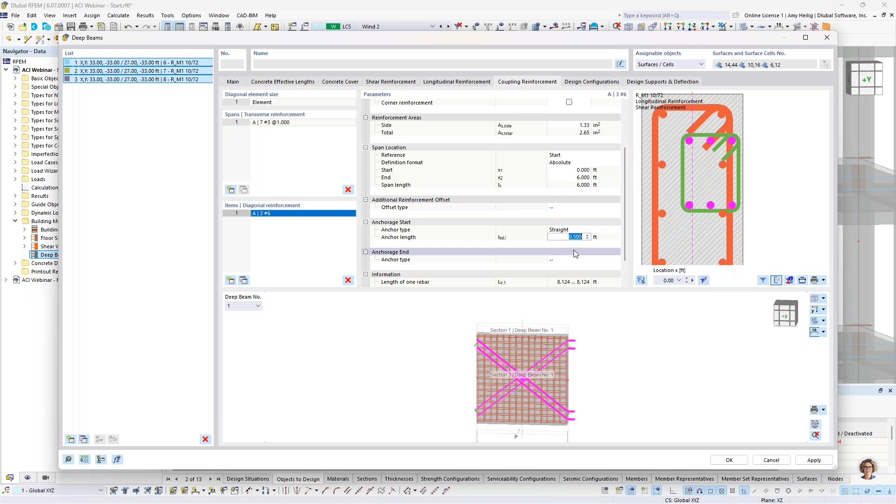If we wanted to do that, we would select the anchorage type straight, and modify the length to maybe 1 foot. You'll notice the preview update here at the bottom. We'll set the development length to straight on the left side as well, with an input of 1 foot. That's all the input for this diagonal reinforcement.

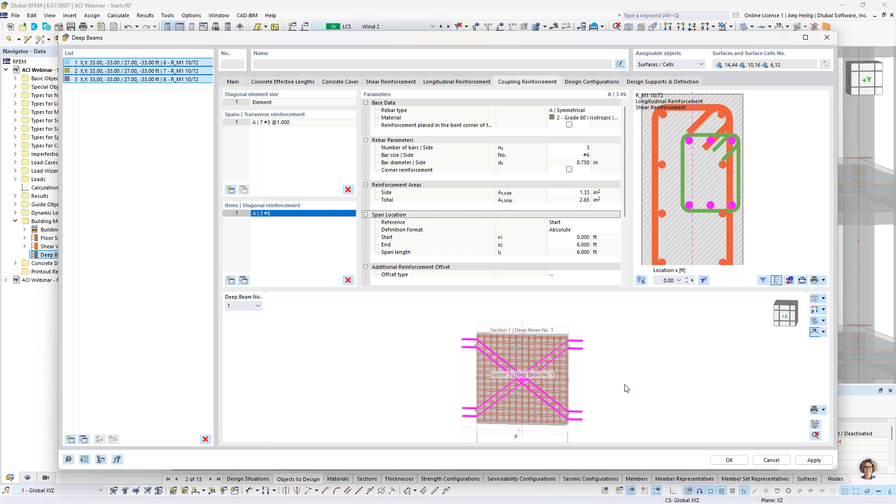The final thing would be the design supports, but in this case we just want it supported at both ends, nothing further to do here. We'll click OK because we are now done with the reinforcement input for both our deep beams and our shear walls.

Now, if we drop down to the concrete design add-on within table format, we have the input data, and as mentioned, here are those design situations. So what I'd like to do is take that first design situation, those factored load combinations grouped together, and set the limit state to the strength design LRFD.

We also have the factored load combinations that include seismic forces in the second design situation, so we want to choose the seismic design limit state from our dropdown. This carries out not only the strength design for these load combinations, but also the additional seismic detailing checks we talked about from chapter 18.

We have here 2 design situations for our unfactored load combinations. These are both going to be set to serviceability design.

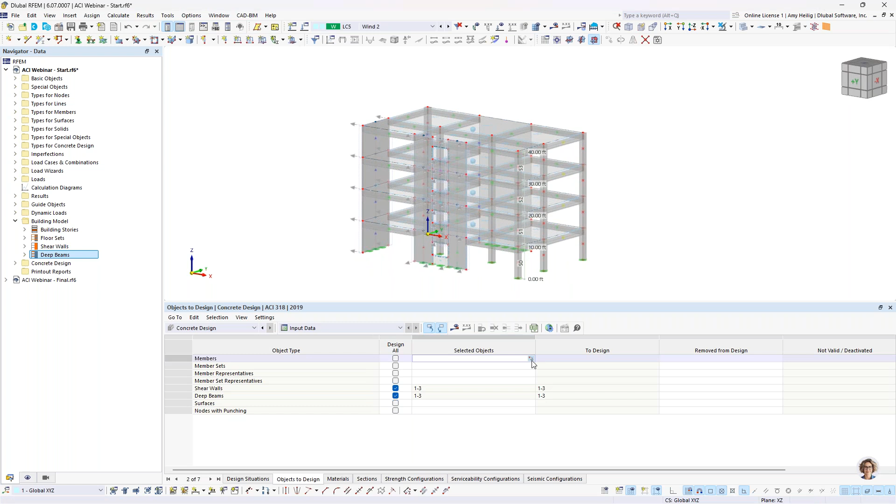Under the objects to design, by default the program selects all objects within the model, but if we don't have reinforcement input for all of these objects, it wouldn't be possible to design them. So we'll leave the design of the shear wall and deep beams active, but for my members, I'm actually going to graphically select only these frames on the right-hand side that I have input reinforcement directly into.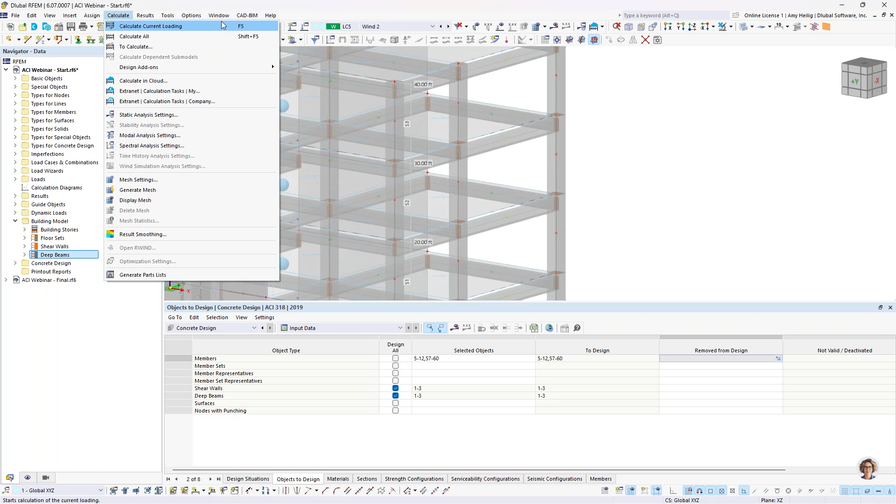Once we're done graphically selecting these, we click OK, and we're ready to run our calculation, so we would normally go to calculate all. It does take a few minutes to run, so in this case I'm going to jump to an already saved model where this calculation has already taken place.

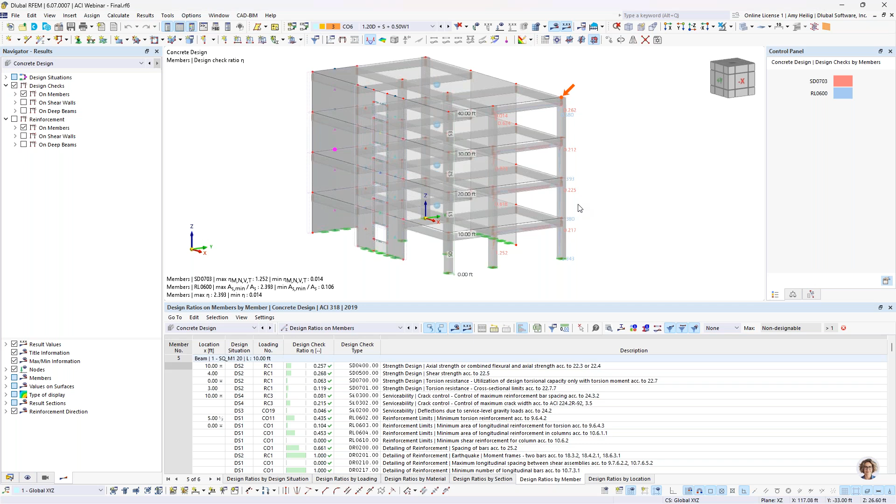What we would see once we are done within the concrete design add-on is our results available in this dropdown, where we can view the design ratios on members, shear walls, or deep beams. If we jump to the design ratios by member, you'll notice that currently we are looking at this top column here.

So we can zoom in and you'll see all of the strength, serviceability, reinforcement limits, and detailing checks that are carried out for every single member here. We can continue to scroll down through this table and see those relevant checks.

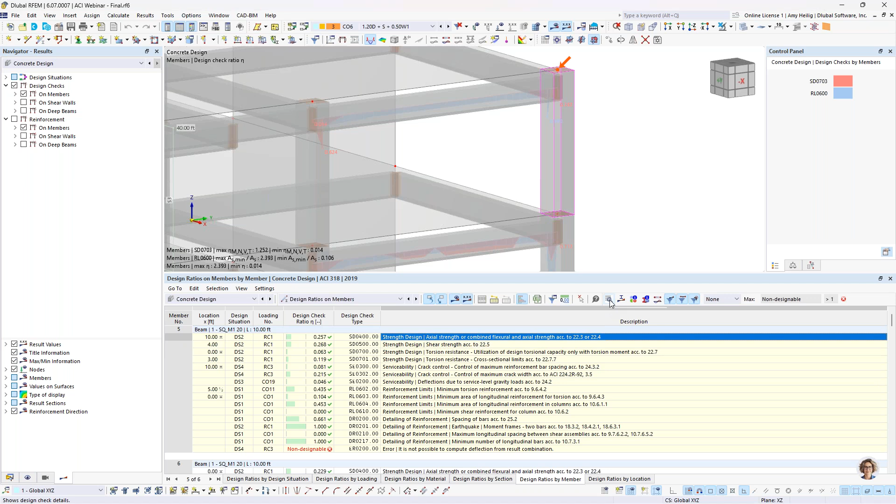For these specific design checks, we can always activate the design check details, which show us in detail all of the calculations, the formulas, the variables, and ultimately how this design ratio was calculated. We also see the design equations and references from the ACI standard, so we can refer to that directly within the code, trying to be transparent in where this information comes from so you can understand how this design ratio is calculated.

Now for our columns, we can also activate the interaction diagram.

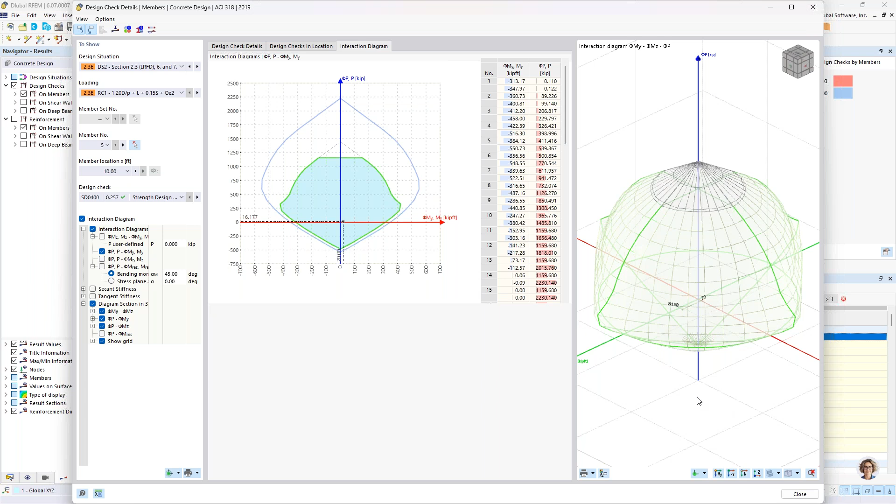So now we get an additional tab up here at the top where we can view this 3D interaction diagram either graphically or in table format. We see exactly where we land within this interaction diagram. This is certainly something that is user-friendly in terms of adding to our printout report or just understanding that column interaction diagram, the results presented here.

The same concept applies for our rib members. Notice as I graphically select one of these rib members, the table will jump to that relevant member here. All of the design checks are shown within table format. The design check details are available if we'd like to take a look at the references, code equations, and things like that.

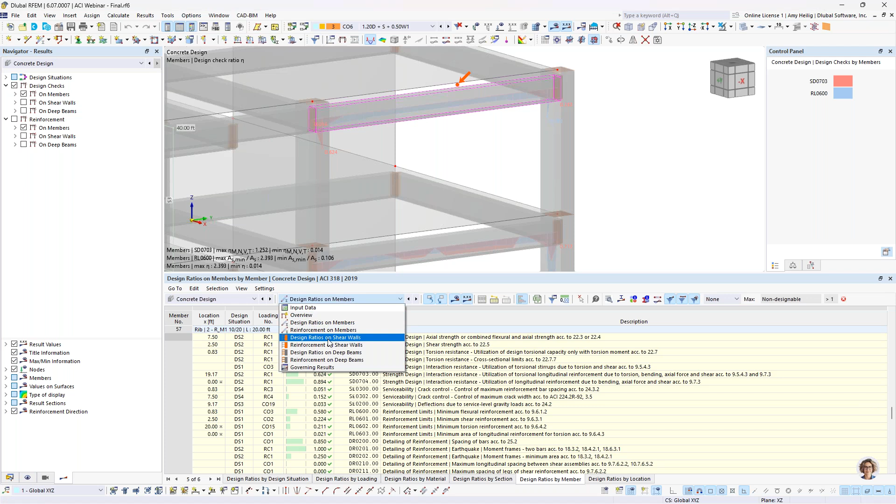Now jumping to the design ratios of shear walls. If we zoom out here, you'll notice that we're currently looking at our first shear wall, and again all of those same design checks. However, we're carrying out the additional checks according to Chapter 11. We'll also see some of those seismic detailing checks included. Similar to the member design, we can activate the design check details to see exactly how this design ratio was calculated with the reference formulas.

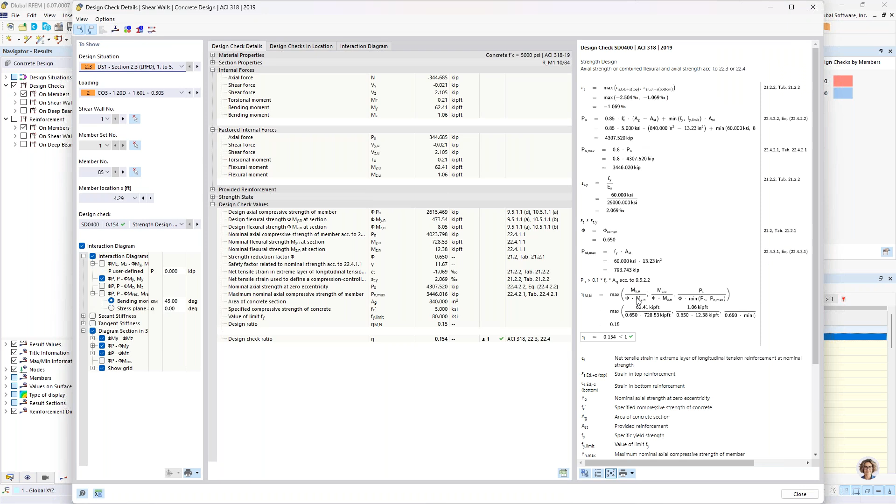Same thing for the design of the deep beams that we have designed. Everything is shown in table format, but it's also possible to show this graphically. For example, if I jump to a wireframe view and look at this deep beam spanning between the two openings, we can turn on the design check ratios for our deep beams - maybe not the overall ratio envelope, but rather for each strength limit design check, I can turn that on graphically. You'll notice that we can overlay these different design checks of this deep beam graphically, depending on which design check we are displaying.

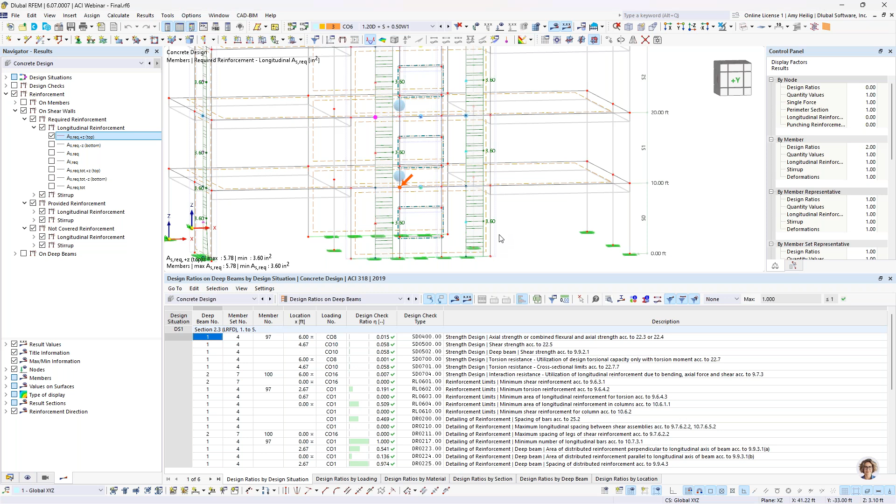In addition to the design checks, you'll see here the ability to display the reinforcement. So we'll turn on the reinforcement display for shear walls, and zoom out here. For my shear wall, I can display graphically the required longitudinal reinforcement - this is the reinforcement that's required from the static analysis. I can overlay this on the provided longitudinal reinforcement, so ultimately we hope that the provided reinforcement is greater than the required reinforcement. And if not, we can further display what we call the not covered reinforcement. So in addition to all of the table output, there are a lot of graphical options here under the concrete design add-on.

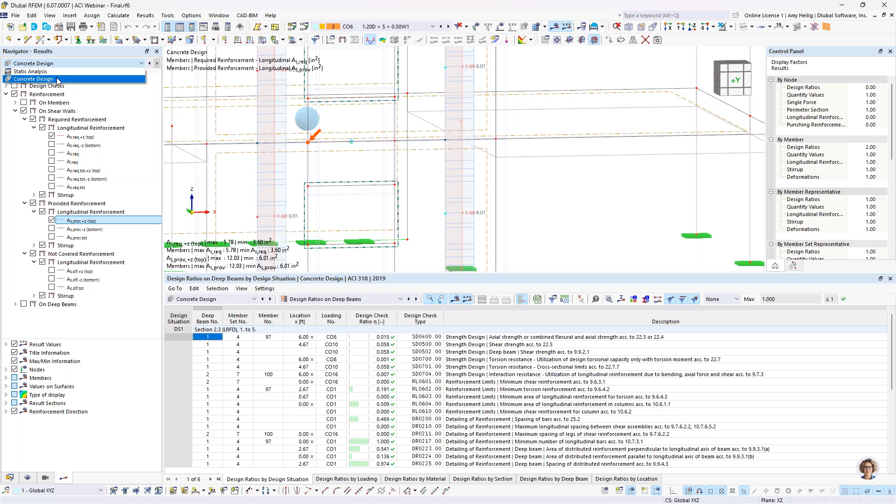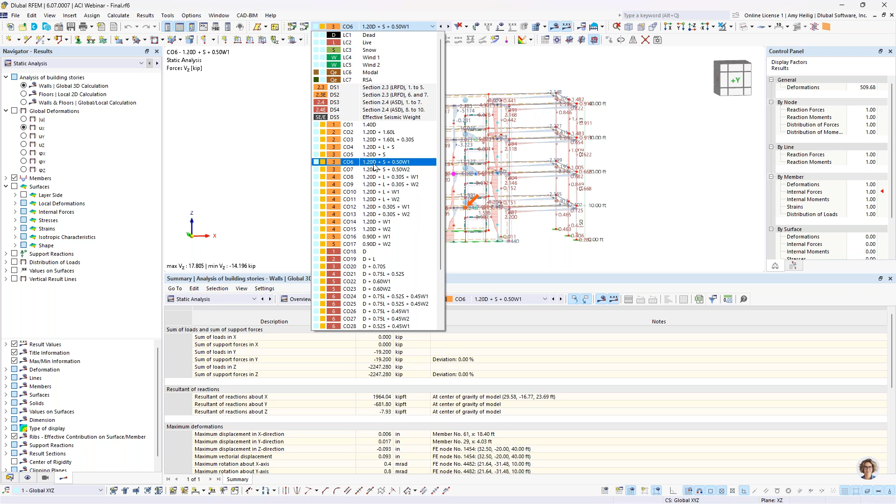Now, the very last thing I want to do is to back up to the static analysis. So we were currently just looking at the design results within the concrete design add-on, but we can easily toggle to the static analysis and choose one of our load combinations. For example, I'll choose load combination number 6, which is dead plus snow plus wind.

We'll turn on the display here of our structure. You'll notice that because I have defined that semi-rigid diaphragm, or if we had defined a rigid diaphragm, we have additional settings up here under the static analysis results, including that 3D calculation. So we're calculating in a 3D environment, all elements are considered. We're running through all of these load combinations, both gravity and lateral loads. We're just going to modify the diaphragm stiffness for this global calculation.

In turn, we can toggle to that local 2D calculation. You'll notice that we're only going to see results here for the floor elements themselves, because we're extracting each one of these floors in a separate submodel. We're placing those line and nodal supports, and then applying the actual stiffness of the surface element itself. And we run through, again, all of these load combinations.

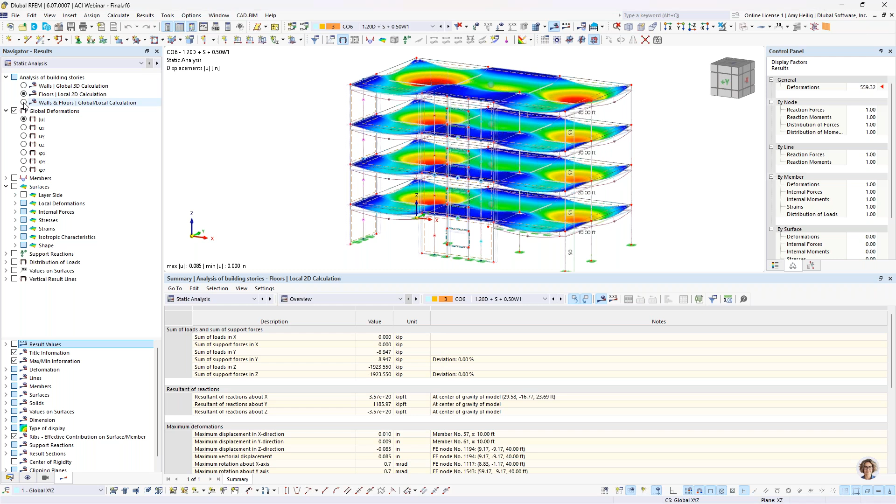Now, what's nice is that I don't have to sit here and try to interpret the results between the 3D versus the 2D, but we have this third option available. This is going to combine both the 3D and the 2D results by adding them together and presenting it graphically as one result. Very powerful that we're not just looking at gravity versus lateral - this is everything combined together. Not only graphically can we view these results, such as member internal forces, surface internal forces, but also in table format as well. We'll see those results change depending on which option we have selected here.

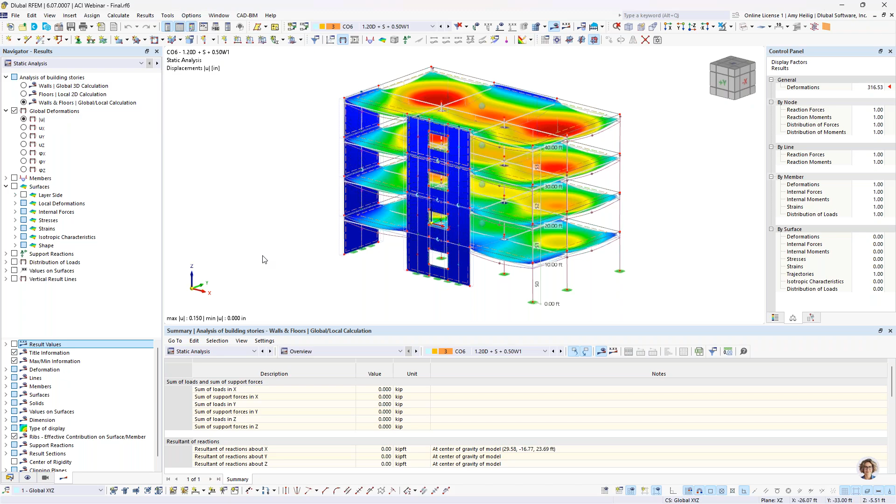As mentioned, we're working on that two-way punching shear reinforcement input. Currently the program's just flagging you if that reinforcement is required, but there's no way to input it. We will release that option in the near future, including for stirrups and headed shear studs.

In a similar manner, the shear wall boundary element reinforcement input. We're running this design check for shear walls, but we're only going to flag you if that boundary element reinforcement is required. So we want to also add in an easy input option under the shear wall to input in that reinforcement.

As mentioned, for those RSECTION sections, those custom cross sections, we want to continue to allow additional design checks beyond bending, and additional seismic design checks. Currently we're just doing seismic detailing within the concrete design add-on, so we'll continue to elaborate on additional seismic checks like strong column and weak beam.

Nonlinear concrete design is currently in development. We previously had this in RFEM 5, but we're really improving this for RFEM 6, where we can account for the true cracked cross-section properties for both members and surfaces, and then we can consider that modified cross-section in both the static analysis and the design.